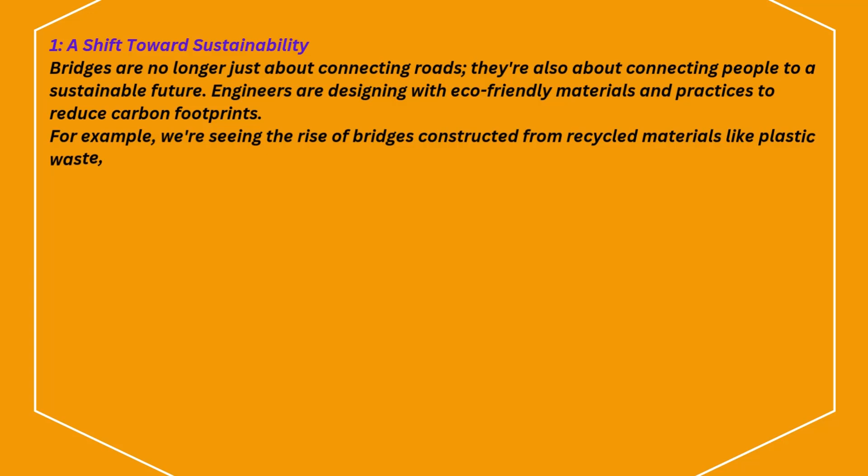1. A shift toward sustainability. Bridges are no longer just about connecting roads. They're also about connecting people to a sustainable future. Engineers are designing with eco-friendly materials and practices to reduce carbon footprints. For example, we're seeing the rise of bridges constructed from recycled materials like plastic waste, which reduce the environmental impact. The use of modular construction, where sections are built off-site and assembled on-site, not only speeds up the process but also minimizes waste and emissions during construction.

2. Innovation in structural design. Engineers are also experimenting with new shapes and forms. Traditional bridge designs like suspension and arch bridges are still relevant, but now we're seeing incredible geometric innovations. Think of bridges with lightweight, yet incredibly strong, materials such as carbon fiber composites. These materials allow for thinner, sleeker designs without compromising safety or durability. Some futuristic designs include self-healing concrete, a material that can repair cracks on its own, extending the lifespan of bridges while reducing the need for frequent maintenance. This not only saves money, but also increases the safety of the infrastructure.

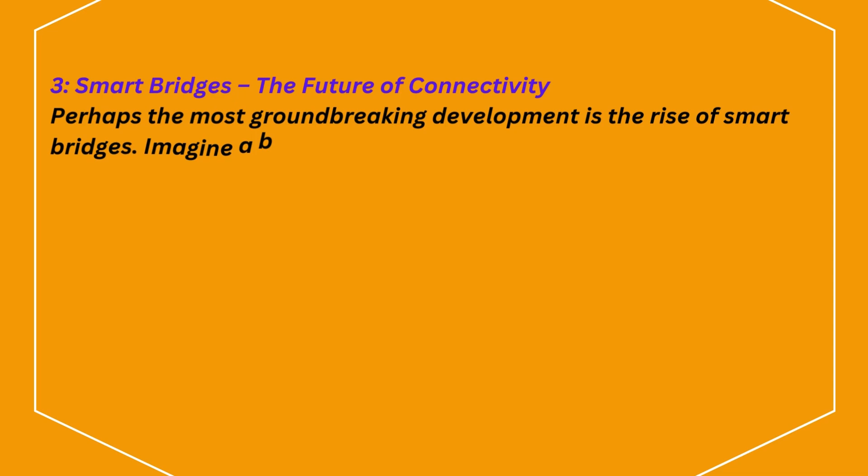3. Smart bridges, the future of connectivity. Perhaps the most groundbreaking development is the rise of smart bridges. Imagine a bridge that can monitor its own health in real time. Sensors embedded in the structure can detect stress, strain, temperature, and even potential weaknesses before they become critical. This data is transmitted to engineers who can analyze it and make real-time decisions on maintenance. Smart technology also helps in predicting how a bridge will behave under certain conditions, like heavy traffic or extreme weather. These insights make it possible to ensure the safety and longevity of bridges, all while minimizing disruptions to daily life.

4. Aesthetic and functional synergy. It's not just about functionality. Modern bridge designs are fusing aesthetics with practicality. Many bridges today are works of art, designed to be both functional and beautiful. Think of the Millau Viaduct in France or the Zhangjiajie Glass Bridge in China. These bridges attract tourists and blend harmoniously with their surroundings, showcasing that a bridge can be more than just infrastructure. It can be a landmark.

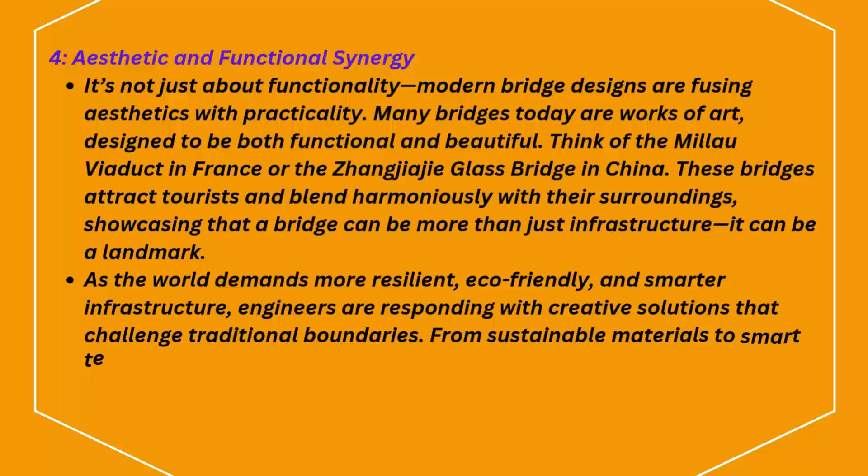As the world demands more resilient, eco-friendly, and smarter infrastructure, engineers are responding with creative solutions that challenge traditional boundaries. From sustainable materials to smart technology, the bridges of tomorrow are being built today. They don't just connect us physically, they represent the future of engineering innovation.

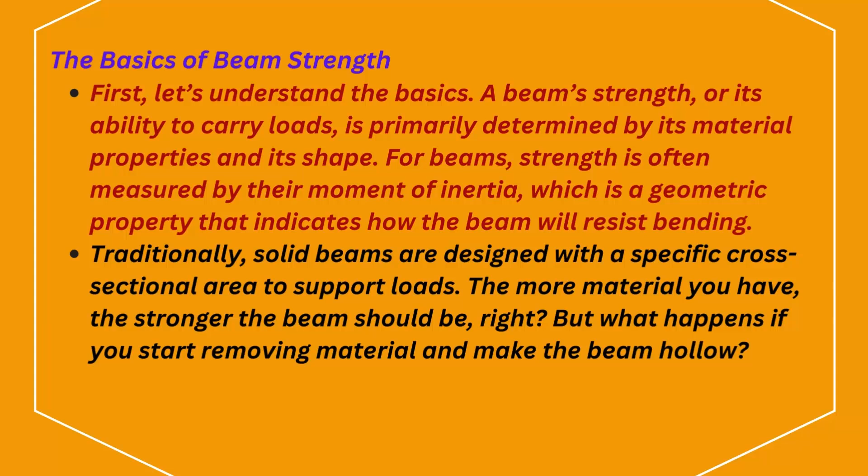The science behind hollow beams. Here's where things get interesting. Hollow beams are often used in engineering and construction for a couple of reasons. 1. Moment of inertia. The moment of inertia, which helps determine the beam's resistance to bending, can actually be increased by making the beam hollow, provided you maintain the right shape. This is because distributing the material further from the center of the beam increases its resistance to bending.

A hollow beam with a well-designed cross-section can have a higher moment of inertia compared to a solid beam of the same weight. 2. Material efficiency. By hollowing out a beam, you reduce the amount of material used while maintaining its strength. This not only reduces the weight of the beam, but also the overall cost of materials. The key is to optimize the hollow space and ensure that the beam's shape supports the load effectively.

Strength-to-weight ratio: hollow beams can achieve a better strength-to-weight ratio than solid beams. For instance, I-beams and tubular beams are hollow, but are extremely effective in resisting bending and shear forces. They're designed to be strong and lightweight, making them ideal for applications where reducing weight is crucial.

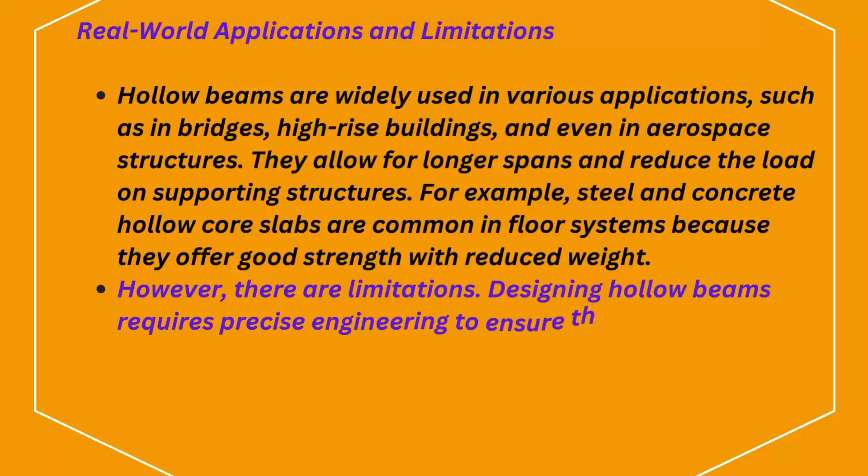Real-world applications and limitations: hollow beams are widely used in bridges, high-rise buildings, and even aerospace structures. They allow for longer spans and reduce the load on supporting structures. For example, steel and concrete hollow core slabs are common in floor systems because they offer good strength with reduced weight. However, there are limitations. Designing hollow beams requires precise engineering to ensure they can handle intended loads and stresses. If not designed correctly, hollow beams can be prone to issues like buckling or stress concentrations.

Debunking the myth: so, can you make a beam stronger by making it hollow? The answer is yes, but with qualifications. A hollow beam...

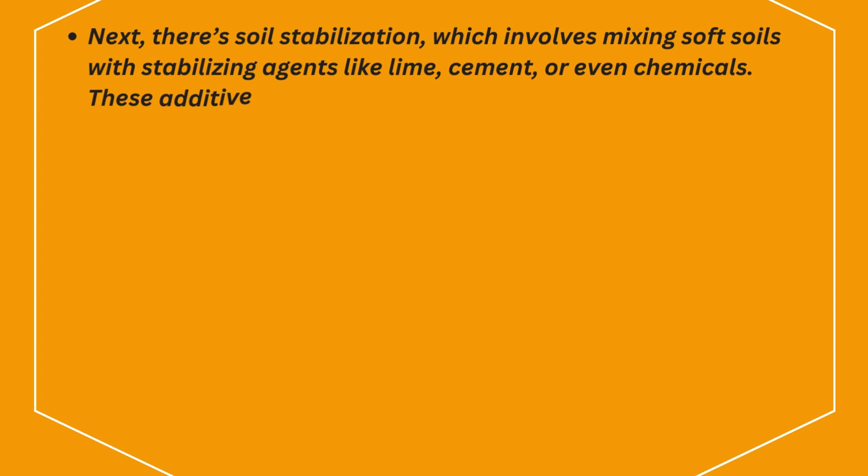These additives react with the soil to improve its strength and reduce its moisture content, making it more suitable for construction. Another technique is deep foundations, where instead of relying on surface soil, engineers drive piles—long columns made of concrete, steel, or wood—deep into the ground until they reach stable soil or bedrock. This allows the structure to transfer its load to a more secure layer, bypassing the soft soil entirely.

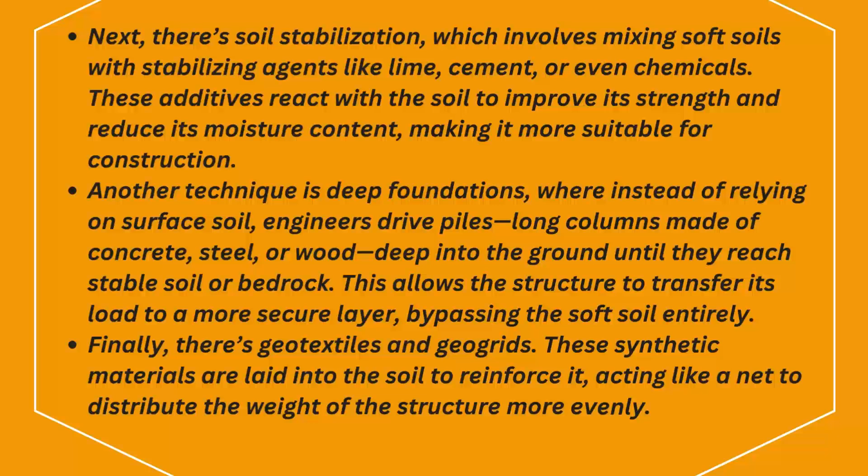Finally, there's geotextiles and geogrids. These synthetic materials are laid into the soil to reinforce it, acting like a net to distribute the weight of the structure more evenly.

Case study: One famous example of building on soft soil is the construction of the Millennium Tower in San Francisco. Initially built on deep foundations that didn't fully reach bedrock, the tower began to sink and tilt due to the soft soil underneath. Engineers are now using advanced techniques like underpinning and soil stabilization to fix the problem, demonstrating the importance of understanding soil behavior when designing large structures.

Building on soft soils is no easy task, but with innovative engineering solutions, we've turned unstable ground into solid foundations for some of the world's most iconic structures. From deep foundations to soil stabilization, civil engineering continues to push the boundaries of what's possible.

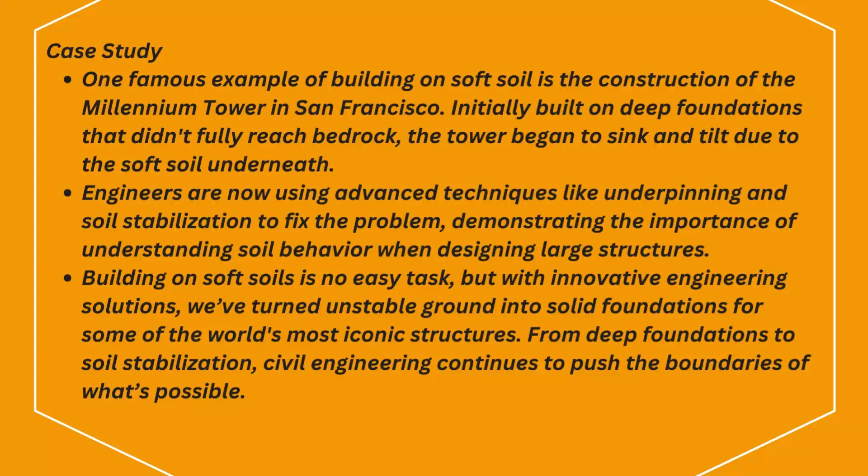Welcome back to Blueprint to Reality, the channel where we turn civil engineering concepts into everyday language. Today, we're comparing two critical structural systems used to resist lateral forces like wind and earthquakes: braced frames and moment-resisting frames. Let's dive into how these systems work and when you should use each one.

What is a braced frame? First up, the braced frame system. In this system, diagonal braces are added between columns and beams to form triangular structures that provide lateral stability. These braces create a stiff structure, allowing the building to resist lateral forces like wind and seismic activity. There are different types of braced frames, such as X-bracing and K-bracing, each designed for different needs, but they all work by converting lateral forces into tension and compression within the braces.

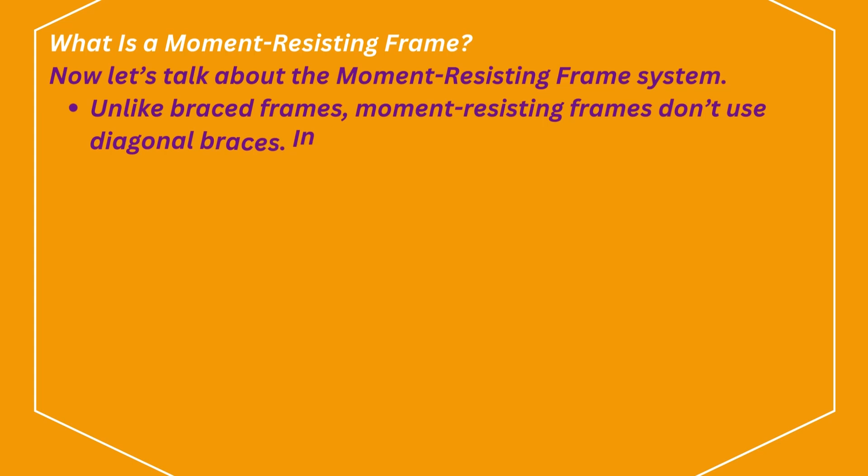What is a moment-resisting frame? Now, let's talk about the moment-resisting frame system. Unlike braced frames, moment-resisting frames don't use diagonal braces. Instead, the joints between the columns and beams are specially designed to resist rotation, meaning they carry bending moments as well as vertical loads. This system provides flexibility in design and allows for more open spaces, since you don't need diagonal braces to block off walls or windows. However, it relies heavily on the strength of the beam-column connections to resist lateral forces.

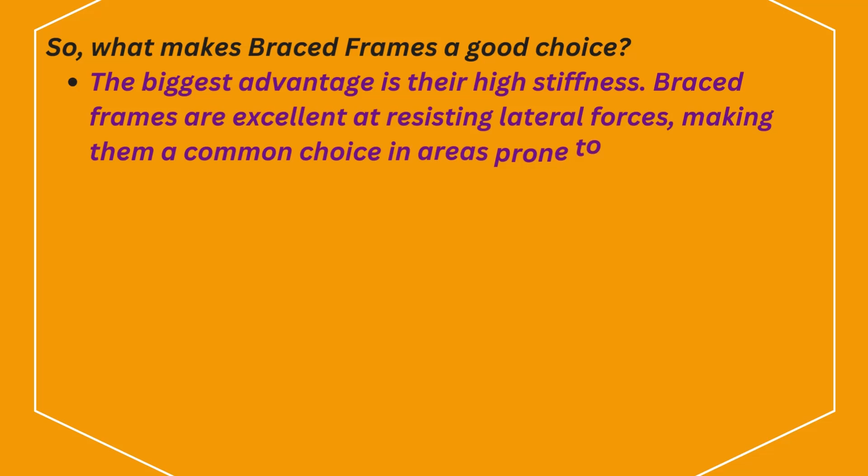So, what makes braced frames a good choice? The biggest advantage is their high stiffness. Braced frames are excellent at resisting lateral forces, making them a common choice in areas prone to earthquakes and high winds. They're also typically more cost-effective because braces are easier and faster to install than reinforced beam-column joints. However, one downside is that braced frames can restrict architectural design—the diagonal braces often limit where windows, doors, or open spaces can be placed.

Now, let's look at the strengths and weaknesses of moment-resisting frames. These frames offer more design flexibility because there are no diagonal braces. This is ideal for buildings that require large, open spaces or where aesthetics are a priority. Moment-resisting frames also allow for more natural light because you can have larger windows or open facades. However, the construction of these systems is more complex and expensive. The joints between the beams and columns need to be carefully designed and reinforced to handle both vertical and lateral loads.

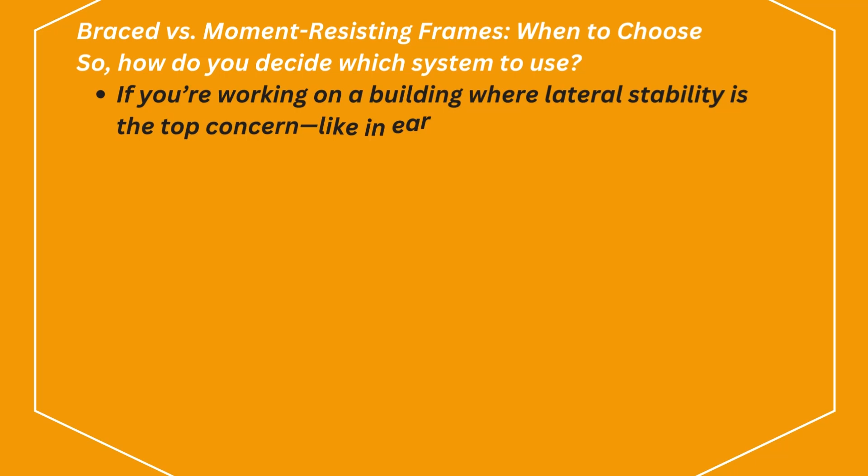Braced versus moment-resisting frames: when to choose. So, how do you decide which system to use? If you're working on a building where lateral stability is the top concern, like in earthquake-prone regions, a braced frame is often the better choice due to its stiffness and cost-effectiveness. But if your project requires flexible design and large open spaces, like in modern office buildings or high-rises, a moment-resisting frame may be worth the extra investment.

In the end, both systems play a crucial role in keeping buildings safe and stable. Your choice depends on the balance between design flexibility and lateral strength.

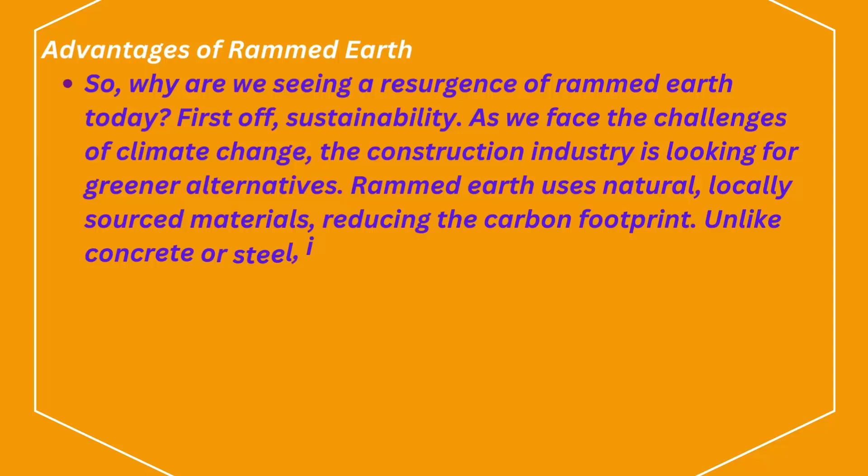Advantages of rammed earth. So why are we seeing a resurgence of rammed earth today? First off, sustainability. As we face the challenges of climate change, the construction industry is looking for greener alternatives. Rammed earth uses natural, locally sourced materials, reducing the carbon footprint.

Unlike concrete or steel, it doesn't require high-energy production processes. Secondly, its thermal properties are a major benefit. Rammed earth walls provide excellent insulation, helping to regulate indoor temperatures naturally. This means reduced energy consumption for heating and cooling.

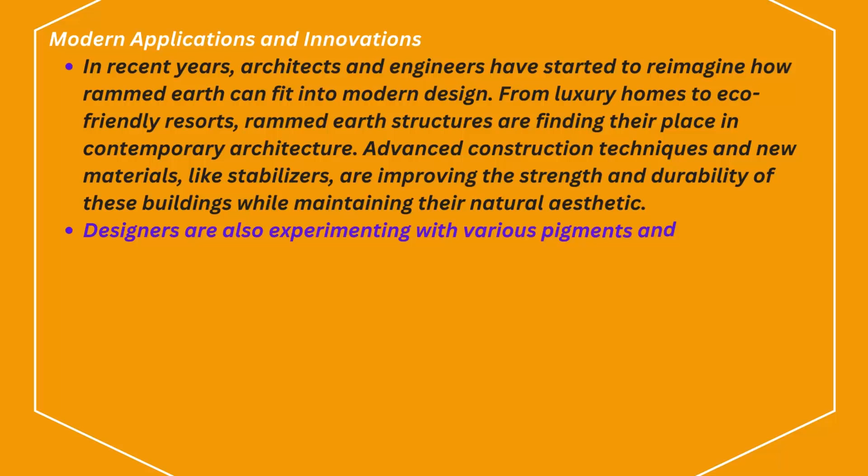Modern applications and innovations. In recent years, architects and engineers have started to reimagine how rammed earth can fit into modern design. From luxury homes to eco-friendly resorts, rammed earth structures are finding their place in contemporary architecture. Advanced construction techniques and new materials, like stabilizers, are improving the strength and durability of these buildings while maintaining their natural aesthetic. Designers are also experimenting with various pigments and textures, creating visually striking structures that blend seamlessly with their surroundings.

Rammed earth is a perfect blend of ancient wisdom and modern innovation, offering a sustainable, durable, and beautiful building solution. As we move forward in the age of eco-conscious design, this technique may play a key role in reshaping how we think about construction.

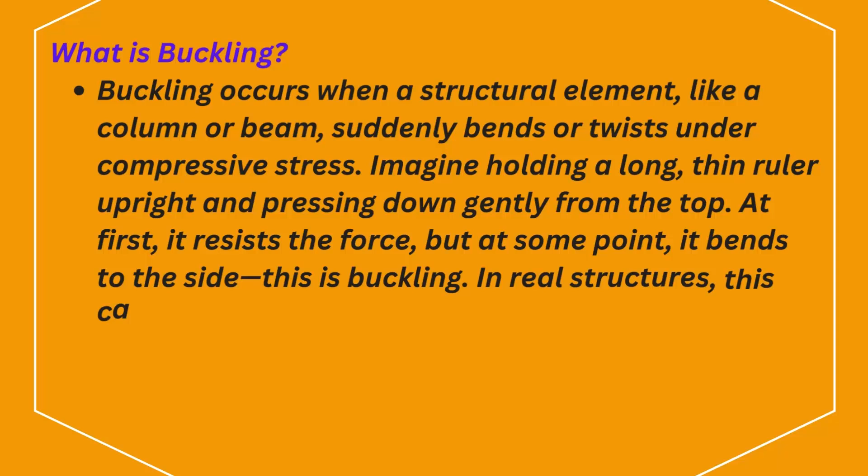This is buckling. In real structures, this can be extremely dangerous. Columns in buildings or bridges are especially vulnerable to buckling when they are subjected to too much weight or force.

Why does buckling lead to collapse? Buckling is dangerous because it often happens without warning. When a structure buckles, the load it was carrying can no longer be supported.

For example, in a skyscraper, if a column buckles, the entire weight of the building above that point may no longer have the proper support, leading to a rapid and catastrophic collapse. This is why buckling is one of the key failure mechanisms that engineers must consider in their designs, especially for tall buildings and slender structures.

Critical load, the tipping point. So what determines whether or not a structure will buckle? Engineers calculate something called the critical load, which is the maximum load a column or beam can handle before buckling.

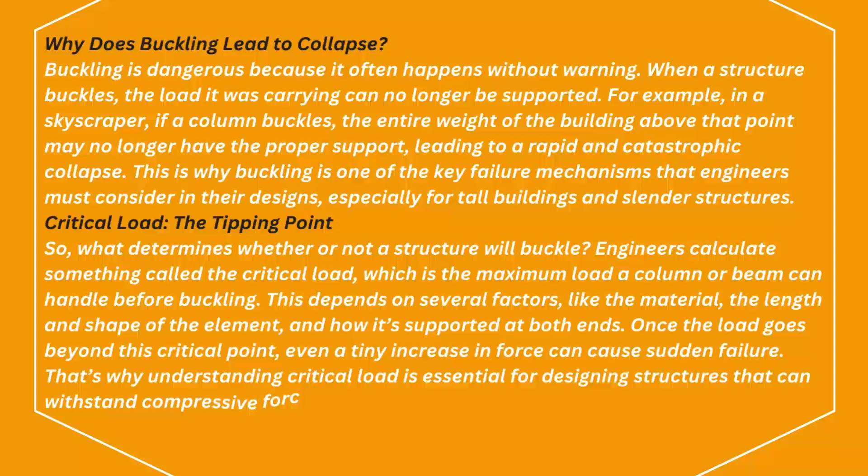This depends on several factors, like the material, the length and shape of the element, and how it's supported at both ends. Once the load goes beyond this critical point, even a tiny increase in force can cause sudden failure. That's why understanding critical load is essential for designing structures that can withstand compressive forces.

Preventing buckling in structural design. To prevent buckling, engineers reinforce structures by adding bracing, using stronger materials, or making columns thicker to resist compressive forces. Sometimes, reducing the length of the columns or providing better support at the base can also minimize the risk. By understanding the causes and effects of buckling, engineers can create safer structures that won't fail under unexpected loads.

Conclusion. In summary, buckling is a silent but severe threat in structural engineering. When a structure buckles under compressive stress, it loses its ability to support loads, leading to potential collapse. By carefully calculating the critical load and designing to prevent buckling, engineers ensure that buildings, bridges, and other structures remain safe and stable, even under heavy loads.

Thanks for listening, and remember, structural safety is all about understanding and preventing failures like buckling.

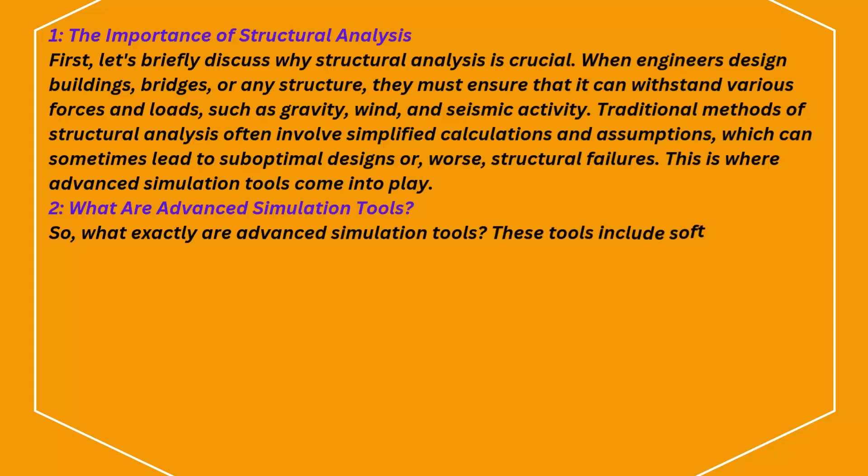So what exactly are advanced simulation tools? These tools include software programs that use finite element analysis, computational fluid dynamics, and other numerical methods to create detailed models of structures. By simulating real-world conditions, these tools allow engineers to visualize how a structure will respond to different forces throughout its life cycle. For example, finite element analysis software breaks down a structure into smaller, manageable elements, calculating how each one behaves under various conditions. This level of detail provides insights that traditional methods simply cannot offer.

Now let's talk about the benefits of using these advanced simulation tools in structural analysis. One of the primary advantages is enhanced accuracy. By taking into account the unique material properties, boundary conditions, and load scenarios, engineers can make better informed decisions. This leads to designs that are not only safer, but also more efficient in material usage.

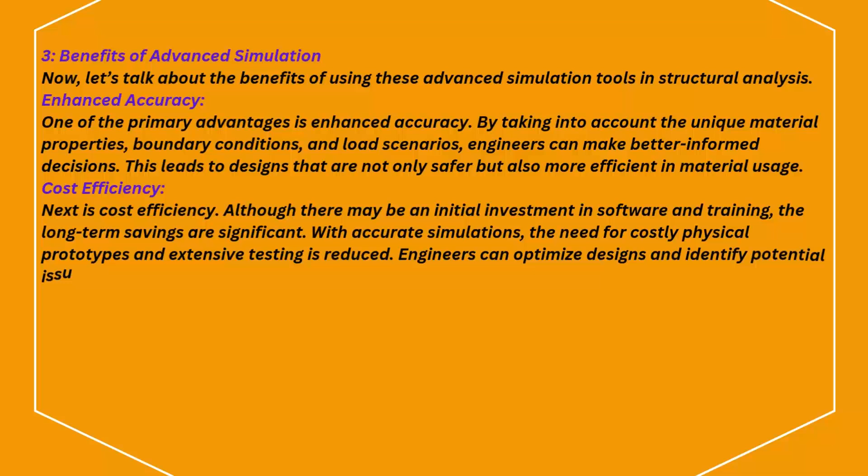Next is cost efficiency. Although there may be an initial investment in software and training, the long-term savings are significant. With accurate simulations, the need for costly physical prototypes and extensive testing is reduced. Engineers can optimize designs and identify potential issues early in the process, saving both time and money.

Moreover, safety is a critical concern in engineering. Advanced simulation tools enable engineers to conduct comprehensive risk assessments and safety evaluations. By simulating extreme conditions, such as earthquakes or heavy winds, engineers can better understand how structures will behave and implement necessary reinforcements or changes before construction begins.

Let's look at some real-world applications. For instance, in the aerospace industry, companies use advanced simulation tools to analyze the structural integrity of aircraft components under various flight conditions. In civil engineering, simulations help design earthquake-resistant buildings in seismic zones, ensuring they can withstand potential disasters.

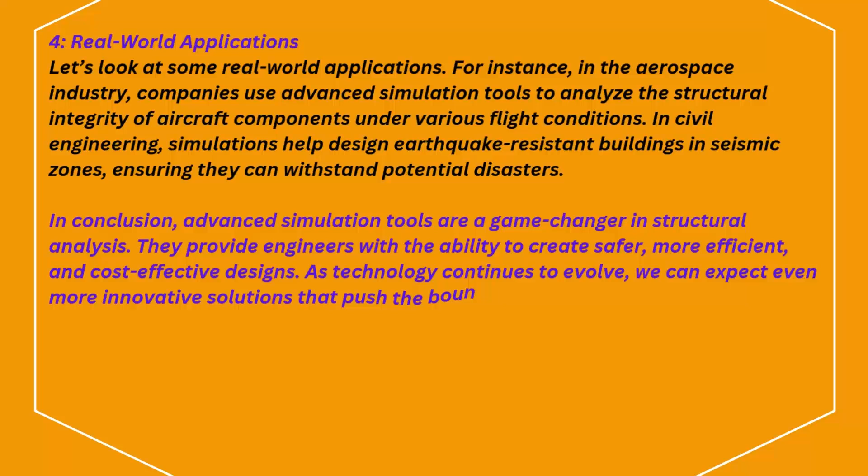In conclusion, advanced simulation tools are a game-changer in structural analysis. They provide engineers with the ability to create safer, more efficient, and cost-effective designs. As technology continues to evolve, we can expect even more innovative solutions that push the boundaries of what's possible in engineering. Thank you for joining us today.

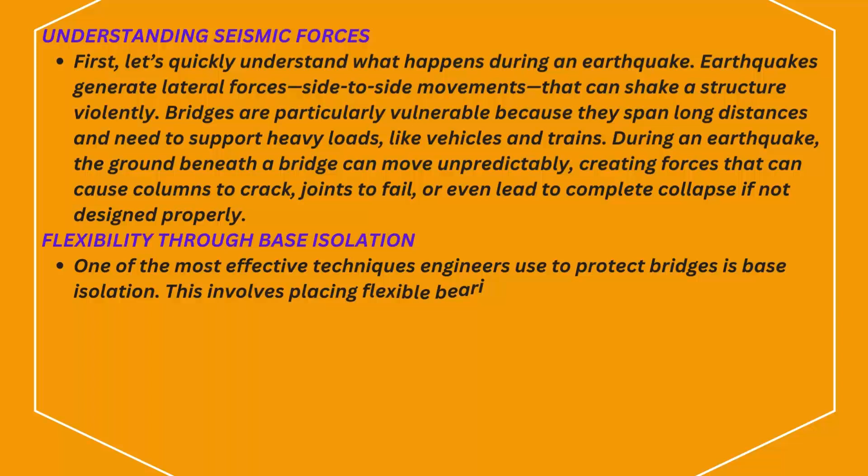Flexibility through base isolation: one of the most effective techniques engineers use to protect bridges is base isolation. This involves placing flexible bearings or isolators between the bridge structure and its foundation. These isolators act like shock absorbers, allowing the bridge to move independently of the ground during an earthquake. By isolating the movement, the bridge can sway with the seismic waves without absorbing the full force of the ground shaking, greatly reducing the risk of damage.

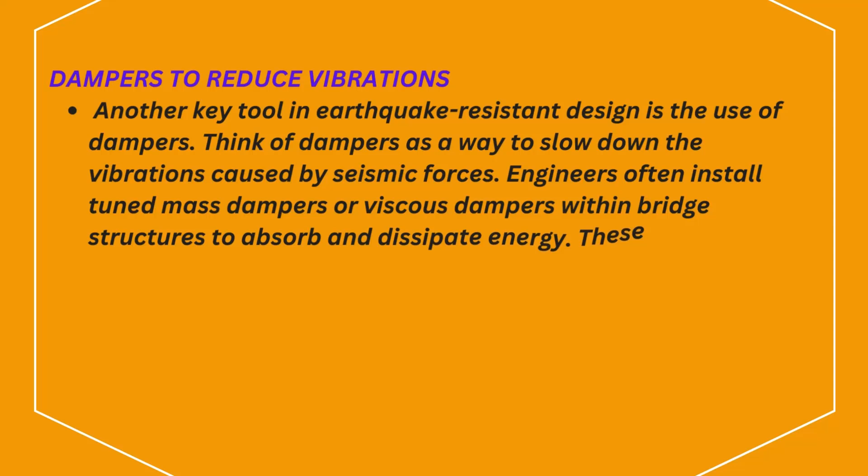Dampers to reduce vibrations: another key tool in earthquake-resistant design is the use of dampers. Think of dampers as a way to slow down the vibrations caused by seismic forces. Engineers often install tuned mass dampers or viscous dampers within bridge structures to absorb and dissipate energy. These devices can reduce the amplitude of vibrations, minimizing the impact on the bridge's key components like its deck and supports. Dampers essentially help calm the shaking, protecting the bridge from excessive stress.

Reinforced pillars and foundations: the next critical aspect of earthquake-resistant design is reinforced pillars and foundations. Engineers use reinforced concrete and steel to strengthen the columns and piers that support bridges. This reinforcement helps resist the intense shear and bending forces caused by earthquakes. In some cases, engineers also use deep foundations or piles that extend far below the surface to reach stable soil or bedrock, ensuring the bridge remains stable even when the ground above it shakes.

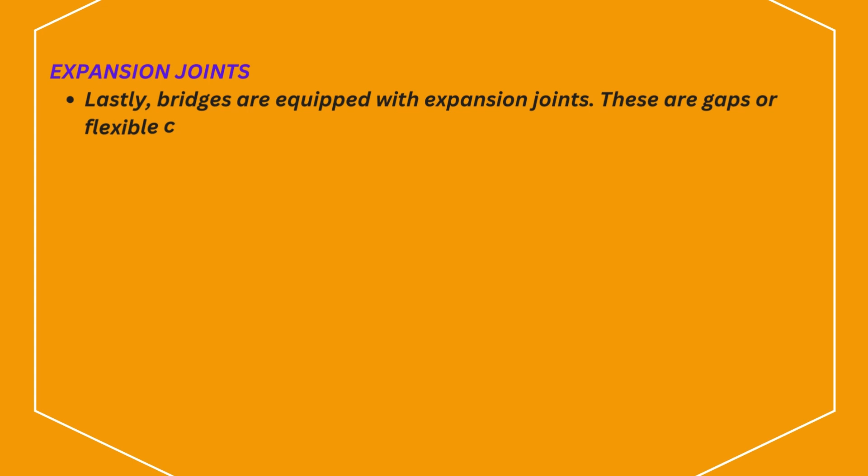Lastly, bridges are equipped with expansion joints. These are gaps or flexible connections that allow different parts of the bridge to move independently during seismic activity. By providing space for controlled movement, expansion joints prevent parts of the bridge from colliding with each other or cracking under stress. They help ensure the bridge can flex without breaking.

By using base isolators, dampers, reinforced pillars, deep foundations, and expansion joints, engineers create bridges that can resist the devastating effects of earthquakes. The goal isn't to make bridges completely unmovable, it's to allow them to flex and absorb seismic forces without collapsing.

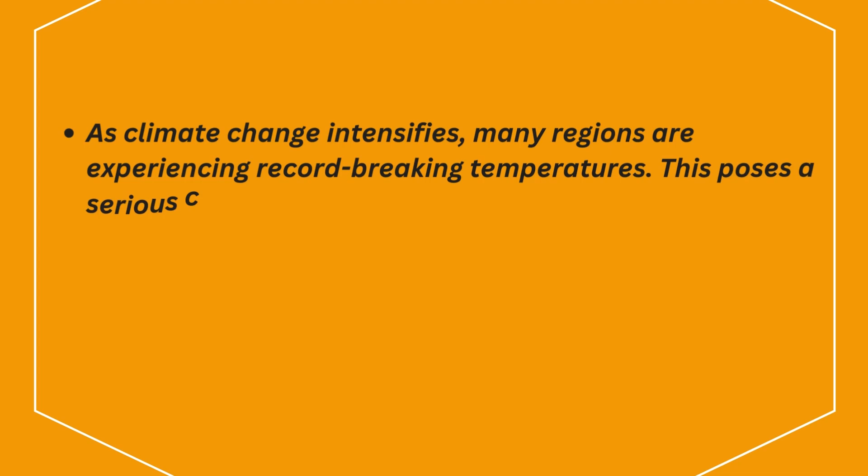As climate change intensifies, many regions are experiencing record-breaking temperatures. This poses a serious challenge for buildings, especially in areas prone to heat waves. But don't worry, we have some smart structural solutions that can help make buildings more resilient to rising temperatures.

The first solution to consider is thermal mass. But what exactly is it? Thermal mass refers to a material's ability to absorb and store heat. In buildings designed for hot climates, materials like concrete, brick, or stone can be used to regulate indoor temperatures. By absorbing heat during the day and releasing it slowly at night, thermal mass can reduce temperature fluctuations. This helps keep interiors cooler during the hottest parts of the day without relying heavily on air conditioning, which saves energy and reduces the building's carbon footprint.

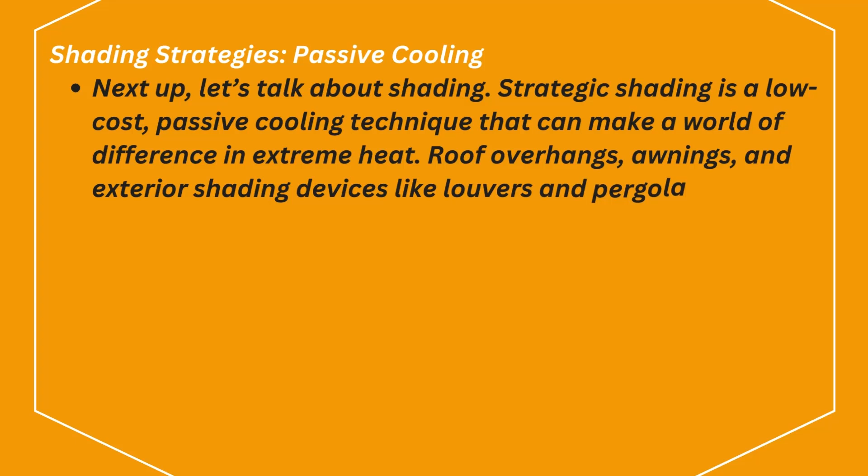Next up, let's talk about shading. Strategic shading is a low-cost, passive cooling technique that can make a world of difference in extreme heat. Roof overhangs, awnings, and exterior shading devices like louvers and pergolas can block direct sunlight from hitting the building's windows and walls. By keeping the sun's rays off the building, shading reduces the amount of heat entering the structure. It's simple, yet highly effective. Combining shading with reflective or light-colored materials further minimizes heat absorption, keeping the structure cool from the outside in.

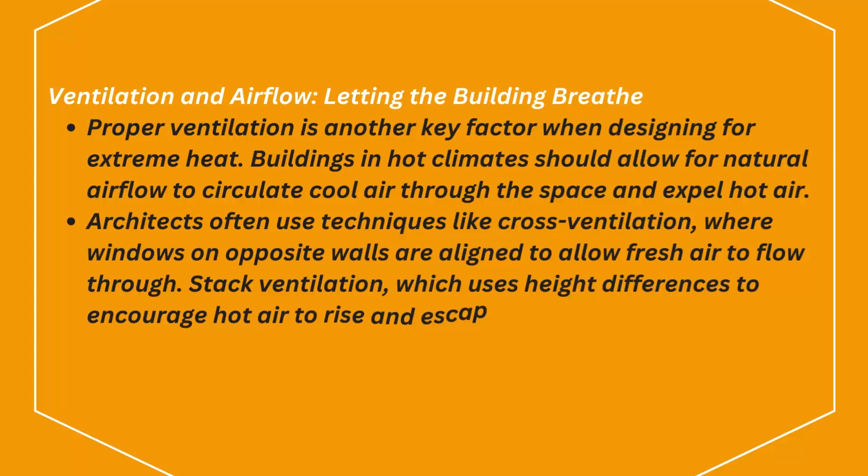Proper ventilation is another key factor when designing for extreme heat. Buildings in hot climates should allow for natural airflow to circulate cool air through the space and expel hot air. Architects often use techniques like cross-ventilation, where windows on opposite walls are aligned to allow fresh air to flow through. Stack ventilation, which uses height differences to encourage hot air to rise and escape, can also be used to keep interiors cool.

Finally, let's explore some innovative materials. Reflective roof coatings and paints can bounce sunlight away from the building, reducing heat buildup. Insulating materials like aerogels provide superior protection against heat transfer, keeping interiors comfortable. These materials not only protect against extreme heat, but also improve the building's energy efficiency, making them a smart choice for future-proofing structures.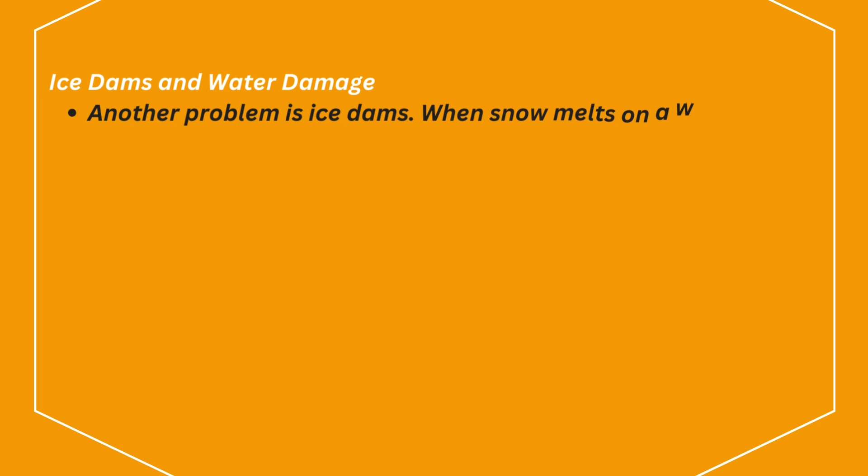These designs reduce the risk of snow accumulating and overloading the structure. Another problem is ice dams. When snow melts on a warm roof and then refreezes at the colder edges, it creates ice dams that can trap water. This trapped water can seep into a building's roof and walls, causing serious damage. Engineers combat this by improving insulation and ventilation in roofs to maintain an even temperature and prevent the formation of ice dams. Proper drainage systems are also key, ensuring that melted snow has a clear path away from the building, preventing both ice buildup and water infiltration.

Thermal expansion and contraction. Cold temperatures also lead to the issue of thermal expansion and contraction. Materials like steel and concrete expand in warm weather and contract in the cold. Over time, this constant movement can cause cracks and weaken structures. Engineers account for this by using flexible materials in critical areas, allowing buildings to expand and contract without causing damage.

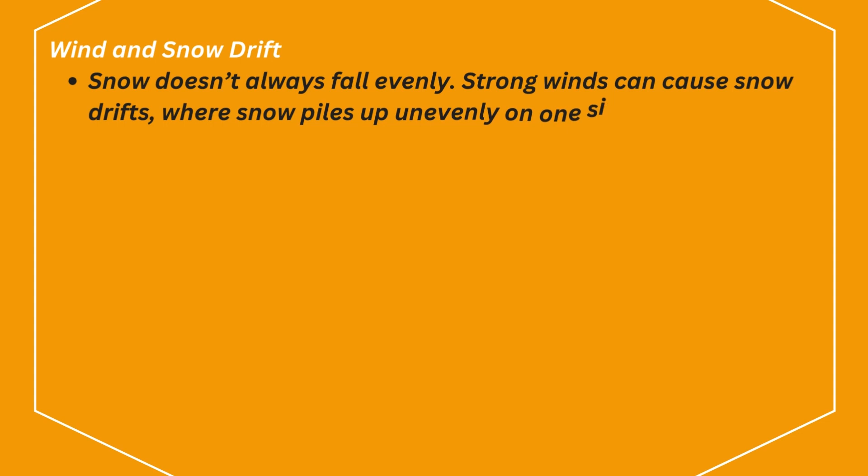Wind and snow drift. Snow doesn't always fall evenly. Strong winds can cause snow drifts, where snow piles up unevenly on one side of a building. This creates unbalanced loads, which can strain the structure in unexpected ways. Engineers design buildings to handle these uneven forces by reinforcing the most vulnerable areas and incorporating wind barriers to control snow distribution. In regions where ice and snow are common, building design requires careful planning and engineering to prevent damage and ensure safety. From steep roofs to advanced drainage systems, engineers use a variety of techniques to keep buildings strong in the face of winter's challenges.

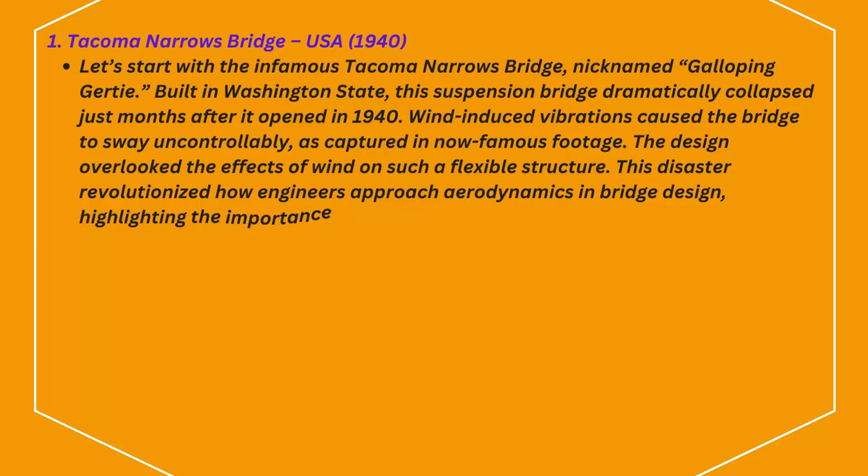2. Hyatt Regency Walkway Collapse, USA, 1981. Next is the Hyatt Regency Walkway collapse in Kansas City, Missouri, in 1981. During a hotel event, 2 suspended walkways gave way, falling onto a crowded lobby below. This collapse killed 114 people and remains one of the deadliest structural failures in U.S. history. The cause? A change in the original design for the walkway's support rods, which couldn't bear the load. This disaster emphasized the dangers of modifying structural designs without thorough re-evaluation.

3. Ronan Point Tower, UK, 1968. The collapse of Ronan Point, a residential tower in London, occurred just 2 months after it was completed. In 1968, a gas explosion on the 18th floor caused one corner of the building to collapse like a stack of dominoes. The failure exposed the fragility of precast concrete panel construction and poor connections between structural components. This disaster led to stricter regulations on high-rise buildings in the UK and better safety standards for gas installations.

4. Sampoong Department Store, South Korea, 1995. In 1995, the Sampoong Department Store in Seoul collapsed without warning, killing over 500 people. The building's failure was caused by illegal modifications to the original structure, including the removal of support columns and overloading of the rooftop. The disaster was a wake-up call about the dangers of ignoring engineering principles in favor of profit, stressing the importance of strict adherence to structural integrity.

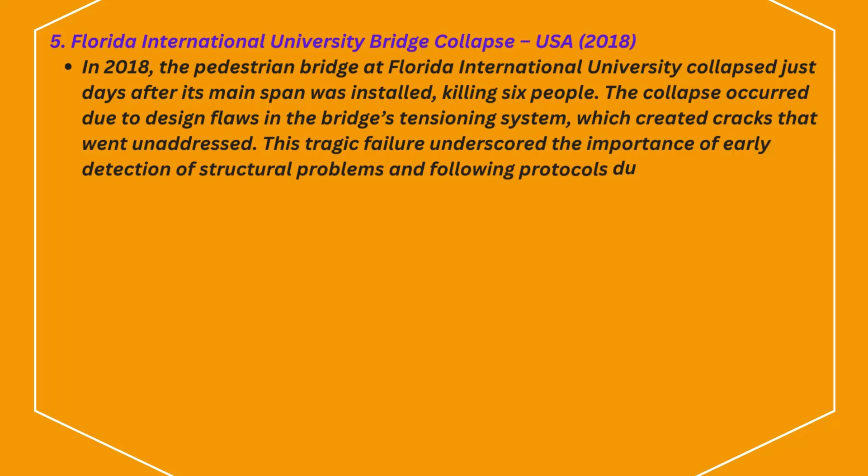6. Rana Plaza Factory Collapse, Bangladesh, 2013. The Rana Plaza factory collapse in Bangladesh is one of the deadliest structural failures in history, killing over 1,100 workers in 2013. The building, which housed multiple garment factories, was poorly constructed with substandard materials and unauthorized floors. The collapse revealed the extreme dangers of cutting costs at the expense of safety and led to worldwide scrutiny of building regulations in developing countries.

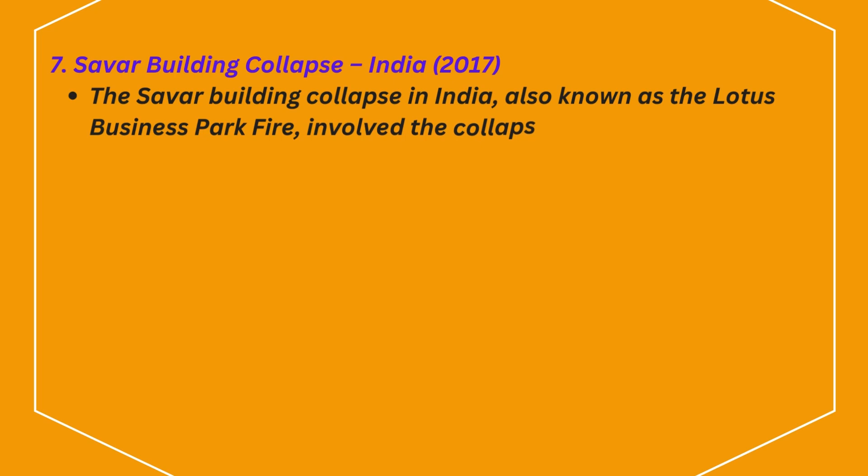7. Savar Building Collapse, India, 2017. The Savar Building collapse in India, also known as the Lotus Business Park fire, involved the collapse of an under-construction building due to poor materials and design. This incident highlighted the need for quality control and proper oversight, particularly in fast-growing urban areas where construction standards may be compromised. Each of these disasters demonstrates what can happen when engineering goes wrong, whether through design flaws, cost-cutting, or poor execution. But they've also paved the way for better practices, stricter regulations, and new technologies.

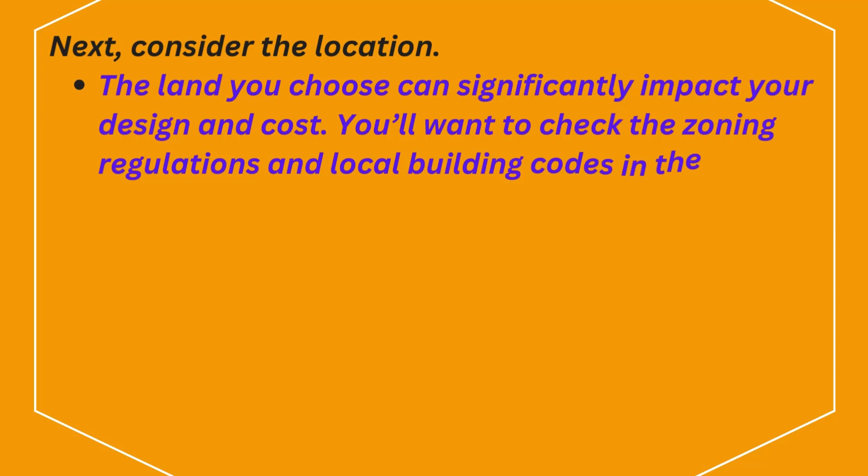Next, consider the location. The land you choose can significantly impact your design and cost. You'll want to check the zoning regulations and local building codes in the area. These will dictate what type of structures you can build, how close to the property line you can go, and what environmental considerations need to be accounted for.

Also, think about the future. Access to schools, shops, and transportation can affect long-term value.

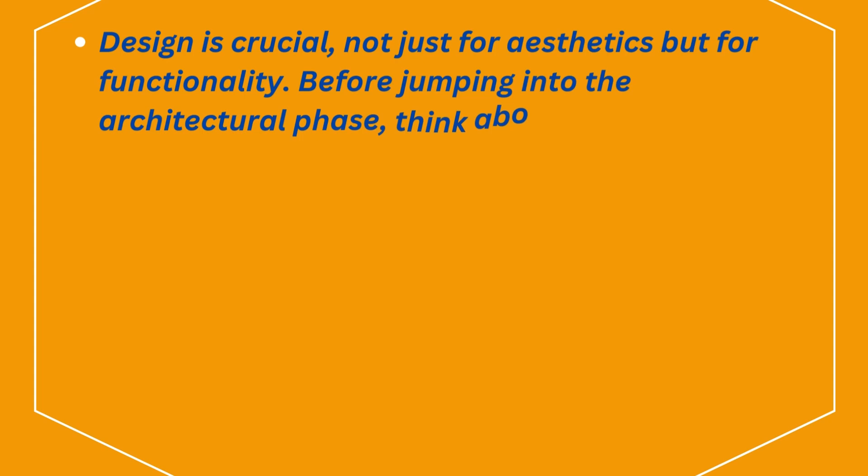Design is crucial, not just for aesthetics, but for functionality. Before jumping into the architectural phase, think about your lifestyle. Do you need a home office? What about a guest room or space for future expansions? Pay attention to the layout and flow, how rooms are connected, natural lighting, and storage solutions. Work closely with your architect or designer to ensure the home meets your present and future needs.

Building a home requires a team of professionals: architects, contractors, and engineers. Do your research and hire a licensed, experienced contractor who has a good reputation. Don't rush the process of selecting your team, and be sure to check references and past projects. A well-coordinated team can save you time, money, and headaches down the line.

Finally, set realistic expectations for your timeline. Construction projects often take longer than expected due to weather, material delays, or labor shortages. Be patient and flexible with your schedule, but also stay involved and keep communication open with your team to ensure things are moving forward. Building a house is a big undertaking, but with the right preparation, it can be a rewarding experience. Keep these tips in mind to stay on track.

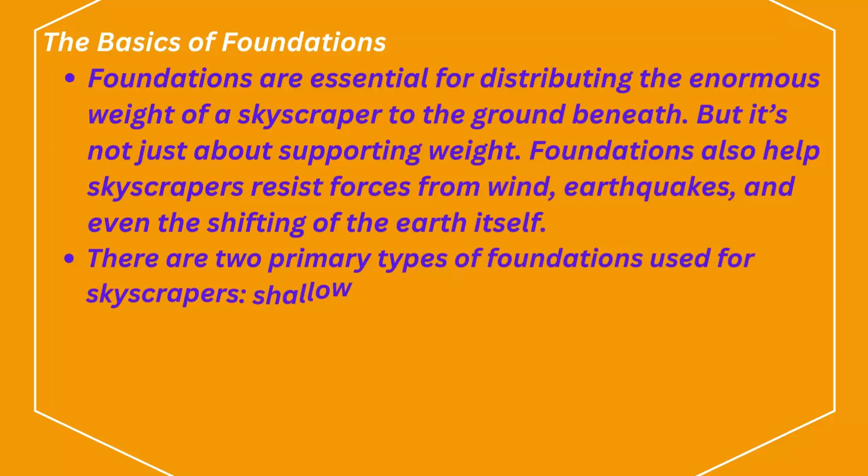There are two primary types of foundations used for skyscrapers: shallow foundations and deep foundations. For small buildings, shallow foundations are usually enough. But skyscrapers? They need something much more robust.

Deep foundations explained. Skyscrapers rely on deep foundations, which go far below the surface, to find solid ground or bedrock. The most common types are piles and caissons. Piles are long, slender columns made of concrete, steel, or even wood that are driven deep into the earth. These piles either reach bedrock or are driven into dense layers of soil that can support the building's weight. The goal? To transfer the load from the skyscraper down to a stronger, more stable layer of earth.

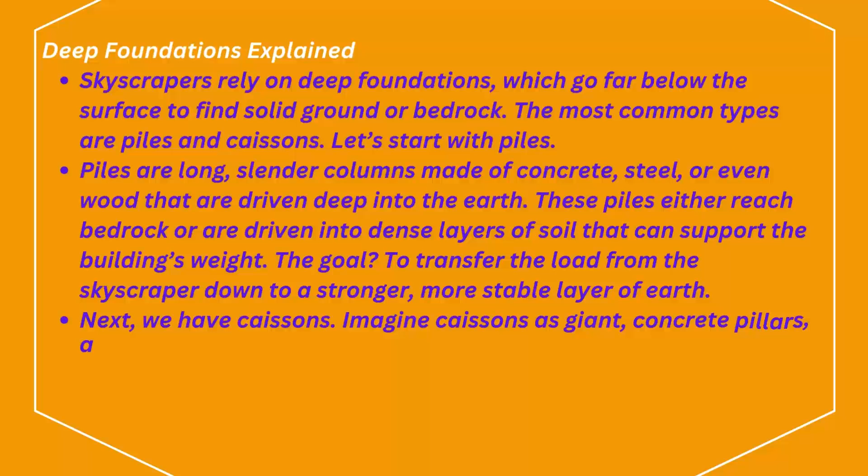Next, we have caissons. Imagine caissons as giant, concrete pillars, almost like enormous, buried columns that reach bedrock. Workers excavate deep shafts, fill them with concrete, and voila, you've got a super strong foundation.

Challenges of building foundations. But it's not always easy. In cities like New York and Chicago, where skyscrapers are everywhere, engineers have to deal with unpredictable soil, water tables, and nearby structures. Sometimes they use a technique called friction piles, where the friction between the soil and the sides of the piles helps support the weight of the building.

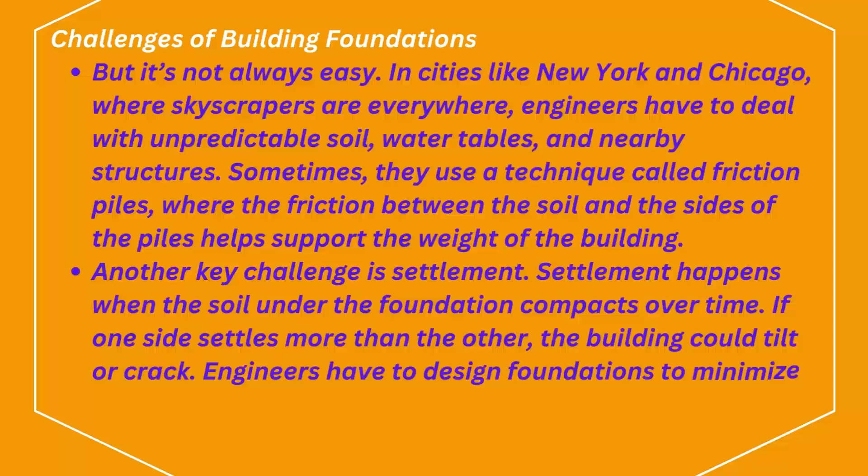Another key challenge is settlement. Settlement happens when the soil under the foundation compacts over time. If one side settles more than the other, the building could tilt or crack. Engineers have to design foundations to minimize this uneven settlement.

How foundations resist external forces. Now, skyscrapers aren't just sitting on the ground. They're battling natural forces like wind and earthquakes. This is where the foundation really shines.

Wind. The foundation anchors the entire structure, preventing it from swaying too much. Engineers even build in flexibility, allowing the skyscraper to move slightly without causing damage. In earthquake-prone areas, the foundation often has to absorb seismic energy.

Engineers use flexible materials and base isolators in the foundation to cushion the impact of an earthquake, reducing the stress on the building itself.

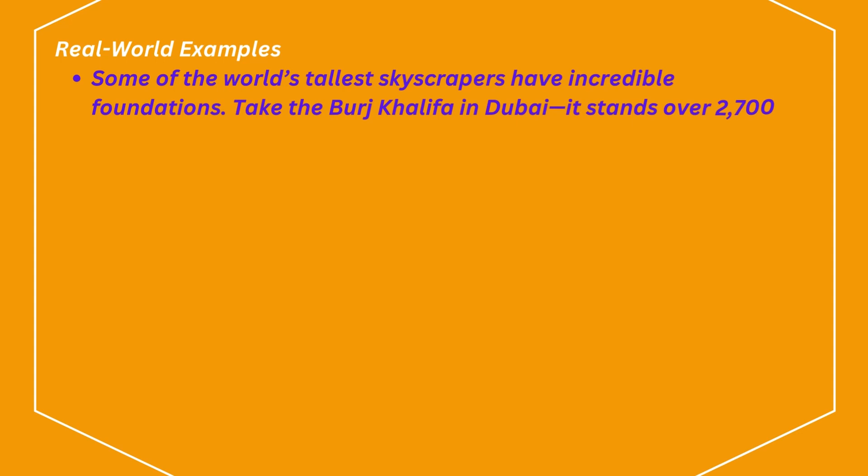Real-world examples: some of the world's tallest skyscrapers have incredible foundations. Take the Burj Khalifa in Dubai. It stands over 2,700 feet tall and has a foundation that extends over 160 feet into the ground, made up of reinforced concrete piles. Then there's the Shanghai Tower, which uses both piles and caissons to deal with the soft soil and seismic risks of the region. Its foundation is built to withstand high winds and potential earthquakes.

So, how do foundations support skyscrapers? By reaching deep into the earth, anchoring the building to solid ground, and resisting the natural forces that could bring it down. Without these marvels of engineering, the towering skylines of cities around the world wouldn't be possible.

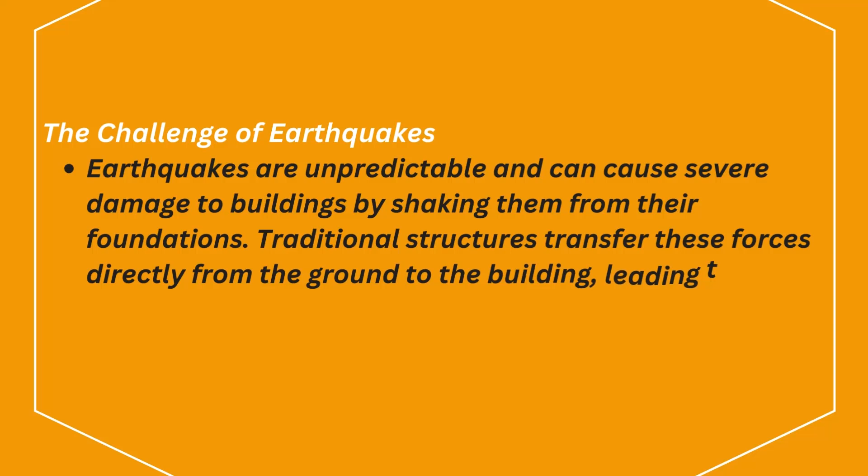Earthquakes are unpredictable and can cause severe damage to buildings by shaking them from their foundations. Traditional structures transfer these forces directly from the ground to the building, leading to cracks, collapses, and structural failures. But innovations like base isolators and tuned mass dampers are revolutionizing how we build to withstand seismic events.

Base isolators. Let's start with base isolators. These devices are installed between a building's foundation and its structure, acting as a buffer during an earthquake. Instead of letting the building move with the ground, base isolators allow the foundation to shift independently from the rest of the structure. This reduces the amount of force transferred to the building, dramatically lowering the risk of damage.

Base isolators typically consist of layers of rubber and steel with a flexible core. When seismic waves hit, the isolators absorb and spread out the energy, allowing the building above to sway gently without absorbing the full impact. Tuned mass dampers.

Now let's talk about tuned mass dampers, another powerful innovation. These are massive weights, usually installed at the top of a building, that move in opposition to seismic vibrations. When an earthquake shakes the building, the damper swings in the opposite direction, effectively canceling out much of the motion.

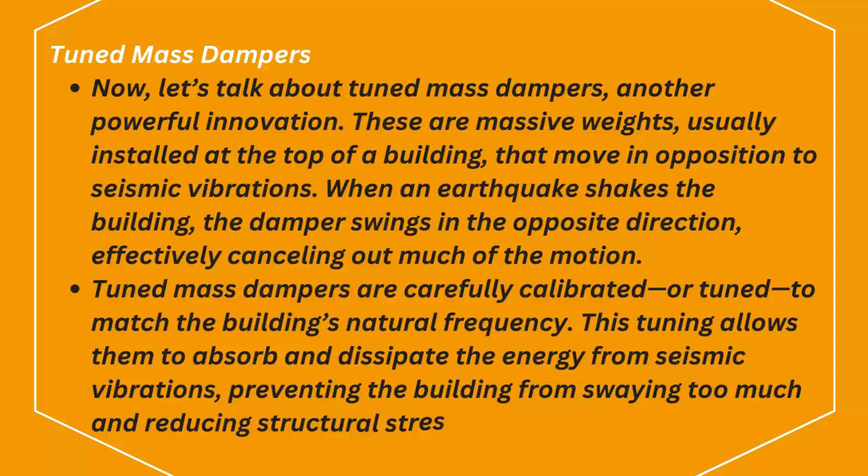Tuned mass dampers are carefully calibrated, or tuned, to match the building's natural frequency. This tuning allows them to absorb and dissipate the energy from seismic vibrations, preventing the building from swaying too much and reducing structural stress. How they work together.

Together, base isolators and tuned mass dampers create a powerful defense against earthquakes. Base isolators protect the building from ground motion, while tuned mass dampers reduce vibrations in the upper structure, making the building safer and more resilient. Innovations like these are changing the way we design buildings in earthquake-prone areas, saving lives and protecting property.

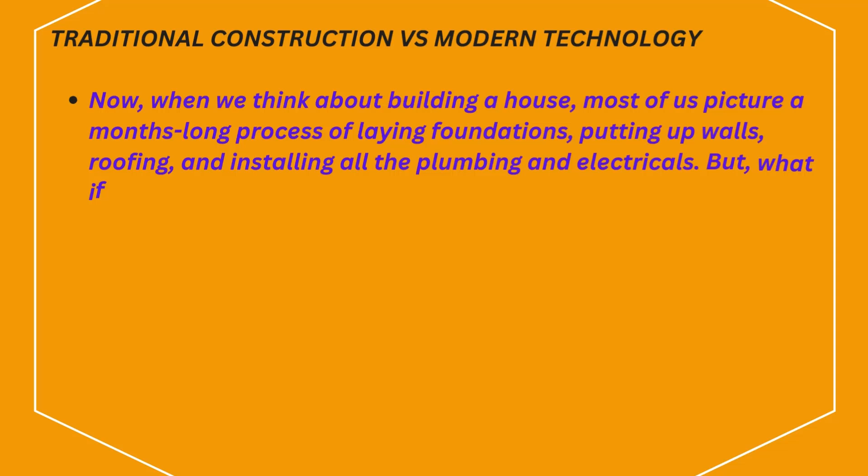Traditional construction versus modern technology. Now, when we think about building a house, most of us picture a months-long process of laying foundations, putting up walls, roofing, and installing all the plumbing and electricals. But what if I told you modern technology has completely revolutionized this?

We're talking about 3D printing, modular homes, and prefabrication, some of the cutting-edge methods that are making fast builds a possibility. Traditional construction involves a lot of manual labor and material delivery delays, but these modern techniques are changing the game.

3D printed houses. Let's start with one of the most exciting innovations, 3D printed homes. Believe it or not, entire houses are now being printed layer by layer using a large-scale 3D printer. This method eliminates the need for traditional bricks, wood, and steel framing, replacing them with concrete or composite materials. But how fast can it really be? In some cases, companies like ICON and Apis Cor have managed to print the walls of a small house in as little as 24 to 48 hours.

That's incredible speed when you think about how long it takes to build walls with traditional methods. However, it's important to note that the 24-hour time frame only applies to the structure itself. You'll still need to install the roof, windows, and finish the interior, which can take additional time.

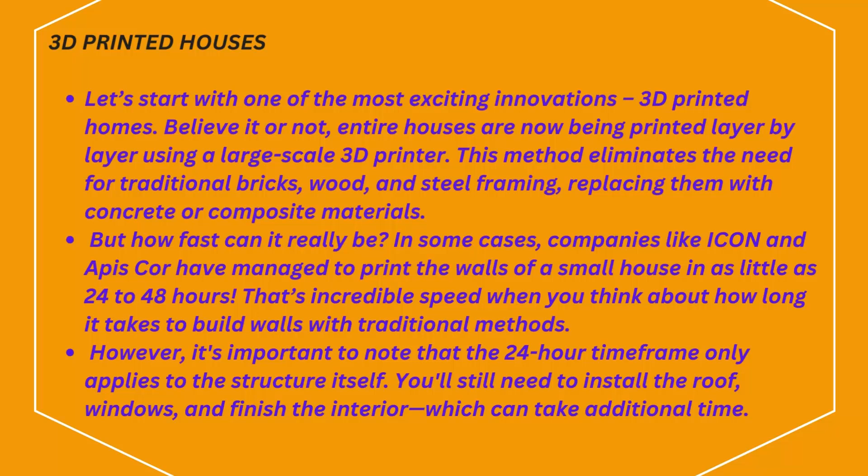Next up, we have modular homes. Think of these as building blocks that are pre-made in a factory, then shipped to your site and assembled like giant Lego pieces. Because the modules are pre-built, the assembly process can take as little as a single day. Yes, that's right, a house assembled in 24 hours. But again, there's a catch. While the assembly is fast, the modules still have to be manufactured ahead of time, which usually takes weeks. So technically, the house can be put together quickly, but the preparation behind the scenes is what makes it possible.

So, can you really live in a house that was built in 24 hours? The short answer is, it depends. While the structure of a home can be assembled or printed in under a day with these methods, the full completion, adding electrical, plumbing, finishing touches, and inspections, still takes time. These quick builds are great for emergency housing, disaster relief, or those looking for ultra-speedy solutions. But for most of us, the idea of a fully livable, custom home in 24 hours is still just a bit out of reach.

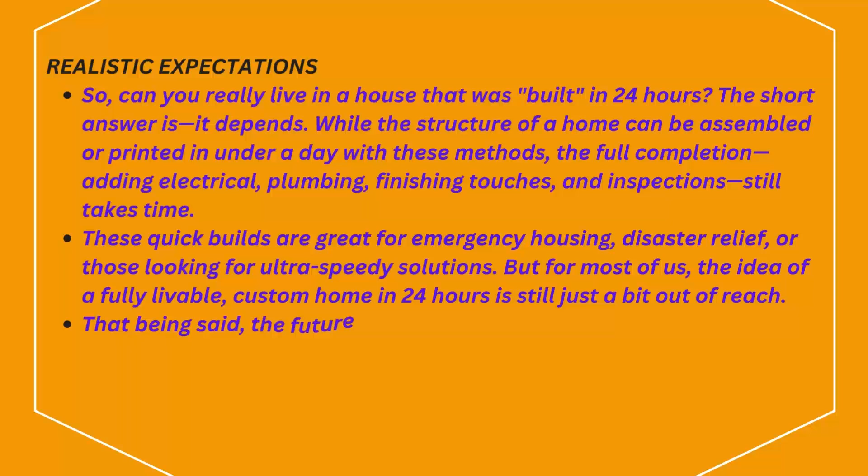Today, we're diving into one of the most fundamental debates in structural engineering, steel frames versus concrete frames. Which is better for your project? Let's break it down. First, what exactly are we comparing?

A steel frame consists of vertical columns and horizontal beams made from structural steel. These frames are like the skeleton of a building, holding up the weight of everything else. A concrete frame is made from reinforced concrete combined with steel bars. Like steel frames, these structures also act as the skeleton but with a much heavier composition.

Let's start with steel. Why is steel so popular? Steel frames are incredibly strong and lightweight. They have a high strength-to-weight ratio, which means less material can support more weight. Steel also allows for flexibility in design. Architects love steel because it can span large distances, which makes it ideal for projects like skyscrapers or large industrial warehouses.

However, steel has some drawbacks. It's susceptible to corrosion, especially in harsh weather conditions. This means maintenance costs can add up over time. And steel loses strength in high temperatures, so in case of fire, special fireproofing treatments are needed.

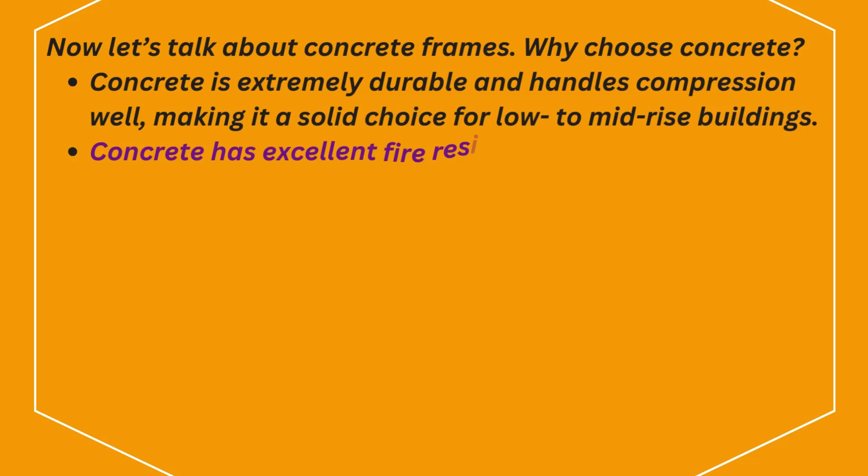Now, let's talk about concrete frames. Why choose concrete? Concrete is extremely durable and handles compression well, making it a solid choice for low to mid-rise buildings. Concrete has excellent fire resistance, and it's great for projects where fire safety is a priority. However, concrete frames are much heavier than steel. That means the foundation has to support more weight, which can increase construction time and cost. Another issue with concrete is its low tensile strength, which is why it needs reinforcement with steel rebar to prevent cracking.

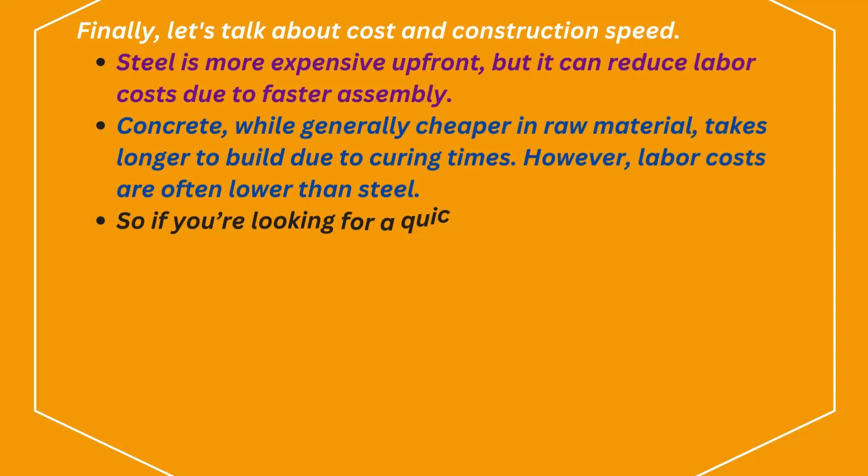Finally, let's talk about cost and construction speed. Steel is more expensive up front, but it can reduce labor costs due to faster assembly. Concrete, while generally cheaper in raw material, takes longer to build due to curing times. However, labor costs are often lower than steel. So if you're looking for a quick build, steel is often the better choice. But if you're focusing on long-term durability and fire resistance, concrete might be your go-to. So, which is better? It depends on your project's needs. Steel offers speed and flexibility, while concrete gives you durability and fire safety.

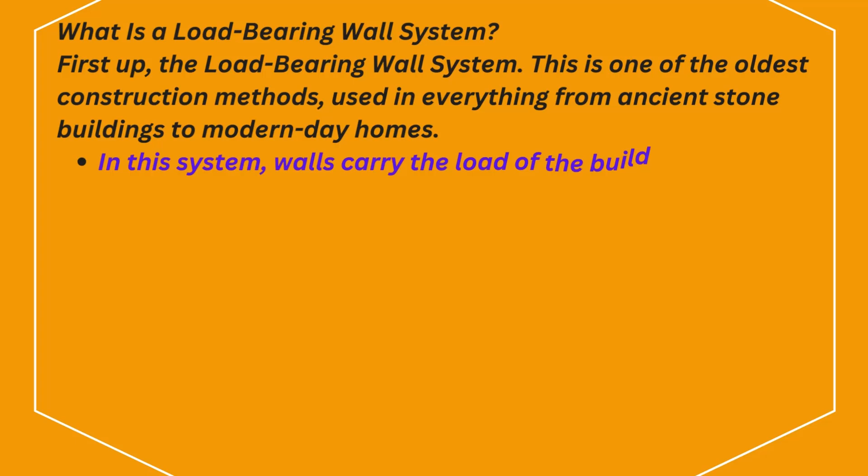What is a load-bearing wall system? First up, the load-bearing wall system. This is one of the oldest construction methods, used in everything from ancient stone buildings to modern-day homes. In this system, walls carry the load of the building, both vertical loads, like the roof, and lateral forces, like wind or earthquakes. These walls act as the primary support, and as a result, they can't be easily modified without affecting the building's stability. One important thing to remember: load-bearing walls usually limit the size of windows and openings because the walls need to remain strong to support the structure.

What is a frame structure? Next, let's talk about frame structures. Unlike load-bearing walls, frame structures use a skeleton made from either steel, reinforced concrete, or wood to support the building.

In this system, the frame, columns, and beams bear the load, while the walls are mostly non-structural, serving as partitions or for insulation. This allows for much larger windows, open spaces, and flexibility in design because the walls aren't carrying any weight. Frame structures are commonly used in high-rise buildings and modern constructions where open floor plans are important.

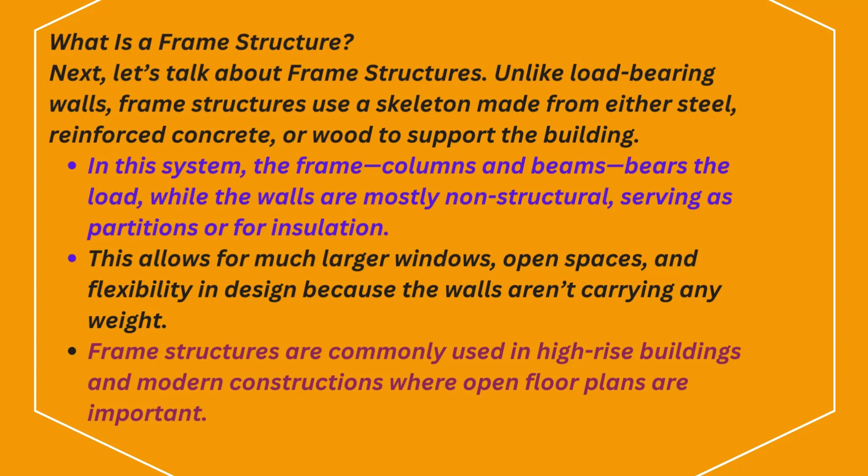Let's go deeper into the load-bearing wall system. What are its strengths and weaknesses? On the plus side, load-bearing walls are often cost-effective for smaller buildings, especially homes, because they don't require as much steel or concrete. They also provide excellent thermal insulation, which can make a building more energy efficient.

However, the downside is limited flexibility. Once the walls are in place, it's difficult to modify the layout without compromising the structure. And if you're looking to build taller than a few stories, this system becomes less practical due to the need for thicker, stronger walls. Now for the frame structure system.

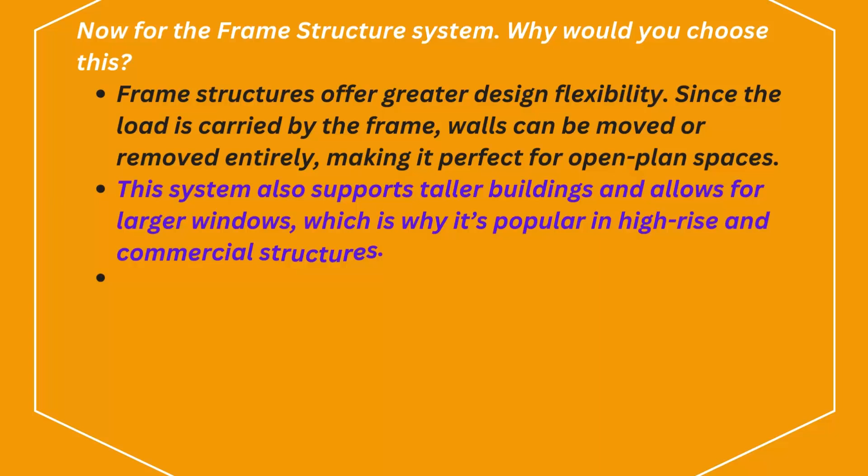Why would you choose this? Frame structures offer greater design flexibility. Since the load is carried by the frame, walls can be moved or removed entirely, making it perfect for open-plan spaces. This system also supports taller buildings and allows for larger windows, which is why it's popular in high-rise and commercial structures. But there are downsides too.

Frame structures can be more expensive to build due to the materials required, like steel or reinforced concrete. They can also require more specialized labor and take longer to construct.

Load-bearing versus frame structures: when to choose? If you're building a low-rise structure, like a residential house or a small commercial building, the load-bearing wall system could be a cost-effective and energy-efficient option. However, if you need design flexibility, large open spaces, or if you're going for a tall building, then frame structures are the way to go.

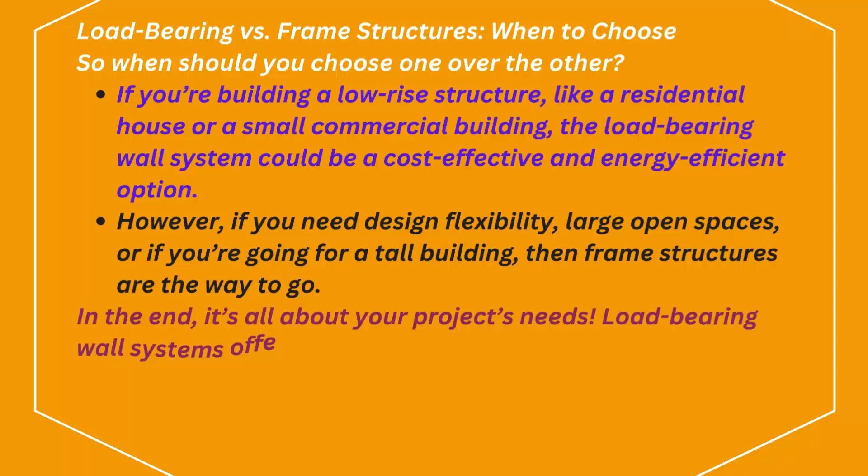In the end, it's all about your project's needs. Load-bearing wall systems offer simplicity and cost savings, while frame structures provide flexibility and support for larger, more complex designs.

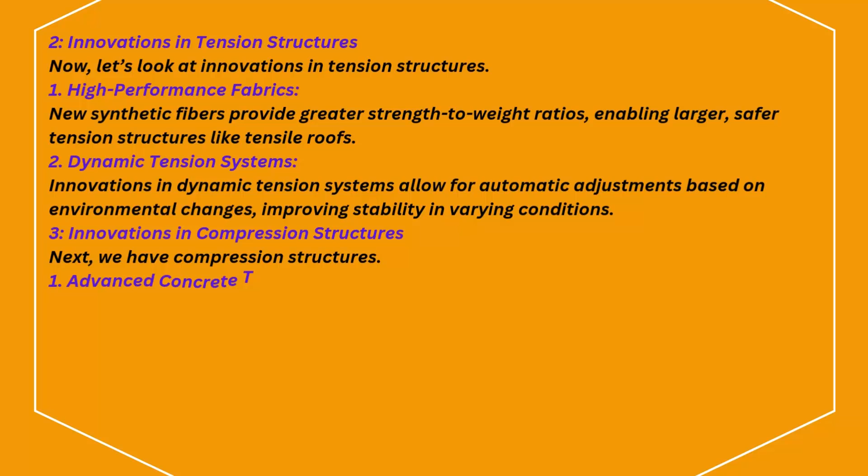Innovations in compression structures. First, advanced concrete technologies: ultra-high-performance concrete, UHPC, offers exceptional compressive strength, allowing for slimmer, more ambitious designs. Second, 3D printing: 3D printing technology enables the creation of complex compression structures that optimize material use and allow for rapid on-site construction.

Integrating tension and compression: combining these elements is leading to innovative hybrid designs. Cable-stayed bridges use tension cables to support the bridge deck, while compression towers provide stability, resulting in lightweight, aesthetically pleasing designs.

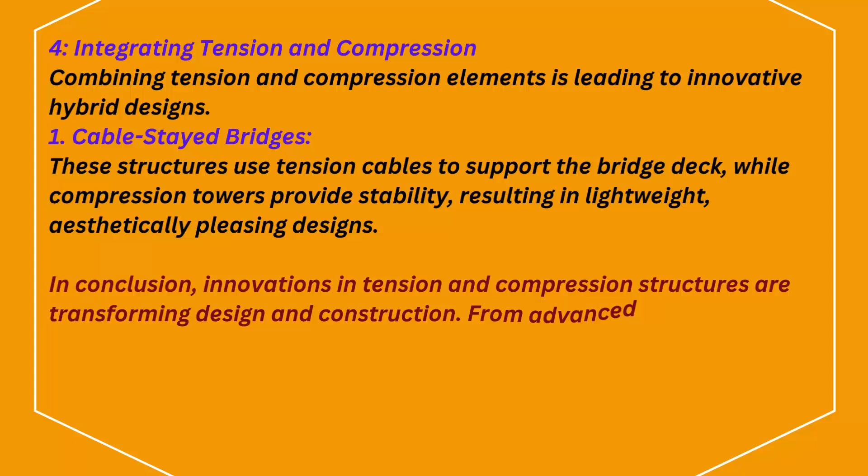In conclusion, innovations in tension and compression structures are transforming design and construction. From advanced materials to 3D printing, these advancements enhance the efficiency and safety of our built environment.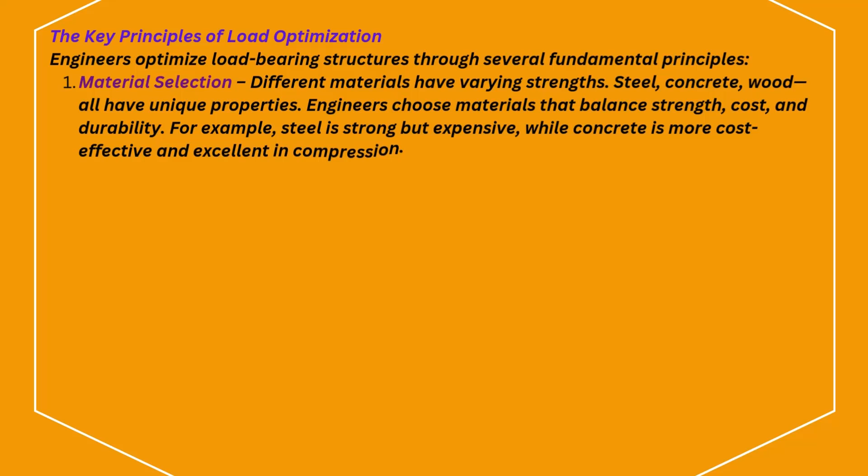Second, efficient shapes. Geometry plays a key role. Triangles and arches are often used because they distribute loads more efficiently than squares or rectangles. That's why you see triangular trusses in roofs and arched bridges. They're strong and require fewer materials.

Third, load distribution. Engineers design structures so that loads are evenly spread across multiple components. Instead of a single beam bearing all the weight, that load is shared across several beams or columns. Think of it as teamwork for materials. No single part bears the entire burden.

Fourth, redundancy. This means creating alternate load paths. If one part fails, another part can still handle the load. This prevents catastrophic collapses, making structures more resilient in emergencies.

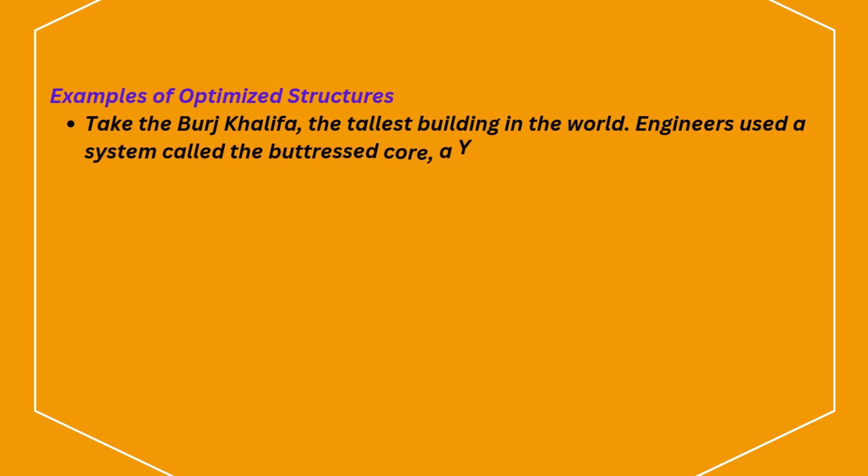Examples of optimized structures. Take the Burj Khalifa, the tallest building in the world. Engineers used a system called the buttressed core, a Y-shaped design that evenly distributes the weight of the tower, reducing the load on any one point. This allows it to soar to 828 meters while still being stable.

Or consider suspension bridges like the Golden Gate Bridge. The cables distribute the bridge's load, allowing it to span incredible distances while staying light and flexible. These examples show that optimization isn't just about using strong materials, it's about using them intelligently.

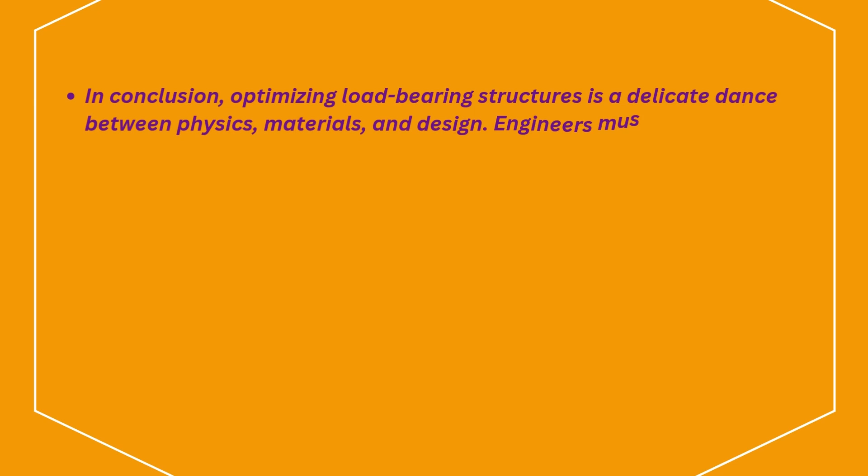In conclusion, optimizing load-bearing structures is a delicate dance between physics, materials, and design. Engineers must balance all these factors to ensure that buildings are both strong and cost-effective. The next time you walk into a skyscraper or drive over a bridge, remember, it's not just a structure, it's a carefully crafted solution designed to bear the loads of our world.

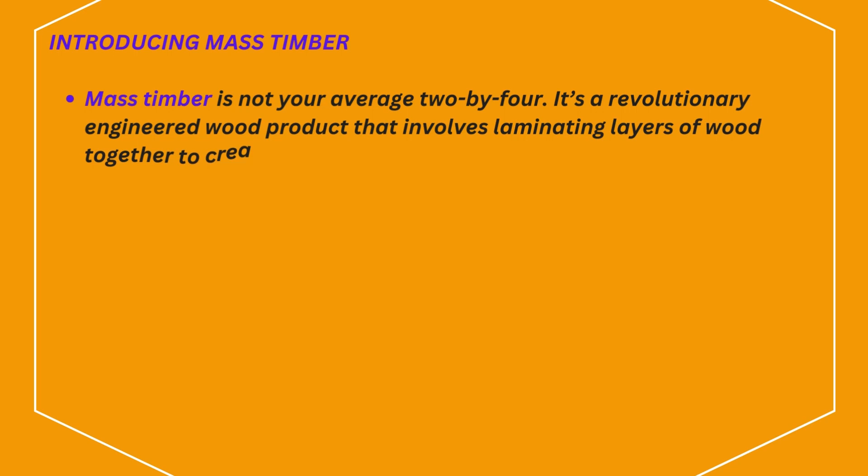The answer lies in a new type of wood material known as mass timber. Mass timber is not your average 2x4. It's a revolutionary engineered wood product that involves laminating layers of wood together to create a material that's incredibly strong, durable, and surprisingly fire-resistant. One of the most popular types is cross-laminated timber, or CLT for short. Think of it as wood on steroids. What makes mass timber special is its ability to match, and sometimes even exceed, the strength of concrete and steel. Because of its strength-to-weight ratio, it can support massive loads without crumbling under pressure.

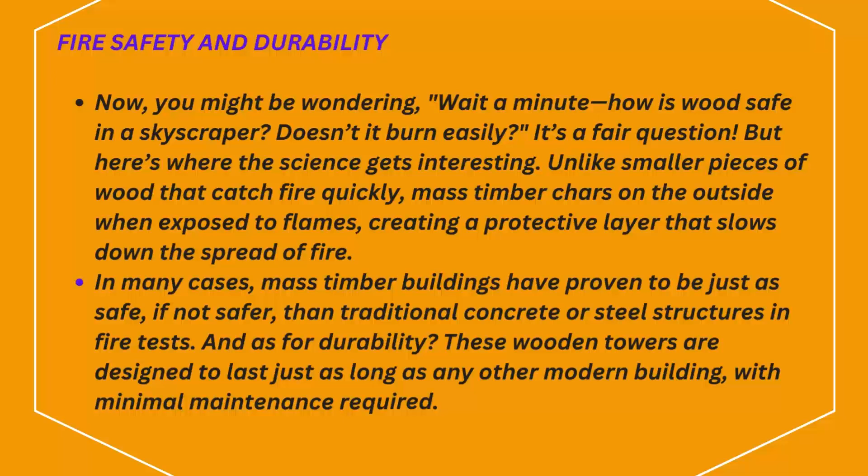Fire safety and durability. Now, you might be wondering, wait a minute, how is wood safe in a skyscraper? Doesn't it burn easily? It's a fair question, but here's where the science gets interesting. Unlike smaller pieces of wood that catch fire quickly, mass timber chars on the outside when exposed to flames, creating a protective layer that slows down the spread of fire. In many cases, mass timber buildings have proven to be just as safe, if not safer, than traditional concrete or steel structures in fire tests. And as for durability, these wooden towers are designed to last just as long as any other modern building, with minimal maintenance required.

Environmental impact. One of the biggest benefits of building skyscrapers with wood is the environmental impact. Concrete and steel require a lot of energy to produce, and they release tons of carbon dioxide into the atmosphere. Wood, on the other hand, is a renewable resource that stores carbon throughout its life, making it an eco-friendly option. In fact, if we start using mass timber on a larger scale, it could drastically reduce the carbon footprint of the construction industry.

We're talking about a greener future, where towering cities are built from sustainable materials. Examples of timber towers. Still skeptical? Well, let's look at some real-life examples.

In Norway, there's the Mjøstårnet, the world's tallest timber building standing at 18 stories. And it's not alone. Projects like the HoHo Tower in Vienna and Brock Commons in Vancouver are proving that wooden skyscrapers are not only possible, but are already reshaping city skylines around the world.

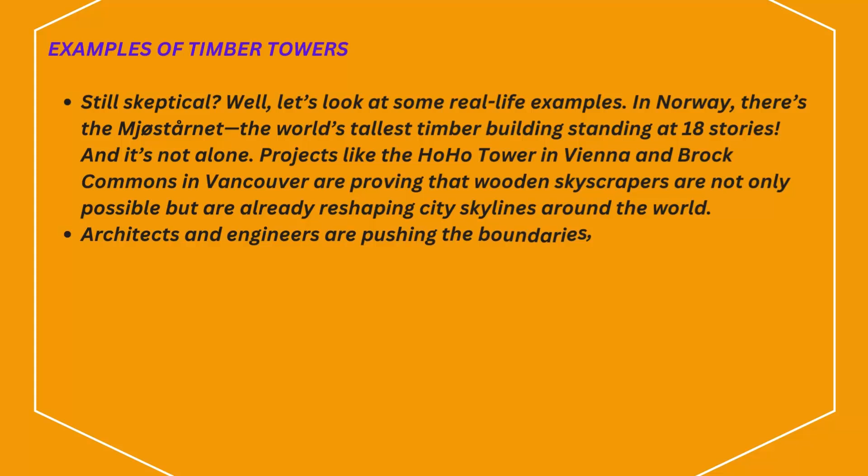Architects and engineers are pushing the boundaries, and some are even designing timber buildings that could reach 30 stories or higher. The potential for wooden skyscrapers is only just beginning. So, can you build a skyscraper out of wood? The answer is a resounding yes. With mass timber, we've unlocked a new frontier in construction that's not only strong and safe, but also sustainable. As urban populations grow and environmental concerns rise, timber towers could be a key part of the future.

These towering structures seem to defy gravity, effortlessly hanging between two points. But what's the secret behind their strength? The basics of suspension bridges. At first glance, suspension bridges are marvels of simplicity, but don't be fooled. The science keeping them standing is anything but basic.

A suspension bridge consists of three key parts: the deck, cables, and towers. The deck is the part of the bridge you drive or walk on, but it's not just resting on solid ground. Instead, it's suspended by cables, massive steel ropes that connect the deck to the towering vertical structures on either end, called the towers. These towers hold most of the weight.

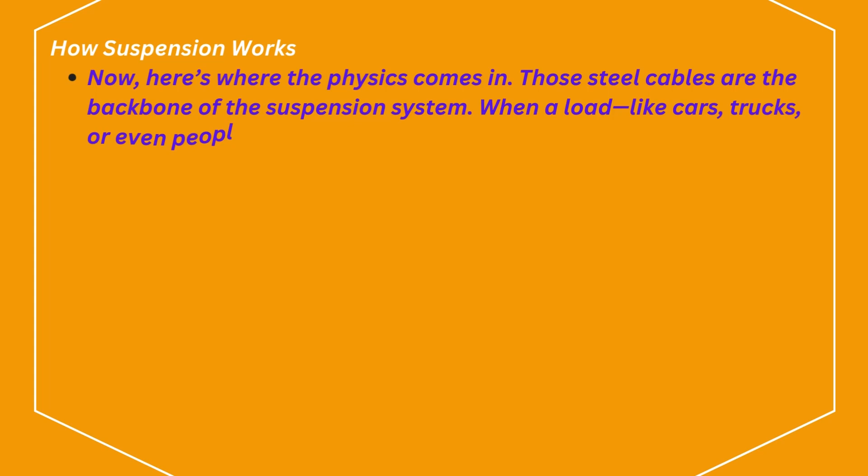How suspension works. Now, here's where the physics comes in. Those steel cables are the backbone of the suspension system. When a load like cars, trucks, or even people moves across the bridge, it creates downward force on the deck. The cables take that force and spread it across the entire span of the bridge. They transfer the load to the towers, which then transfer it down into the ground, or foundations, deep beneath the surface.

Think of the bridge as a giant hammock. The cables are like the ropes of the hammock, and the deck is like the fabric. The weight on the bridge causes tension in the cables, but the towers act as anchors, keeping everything in balance.

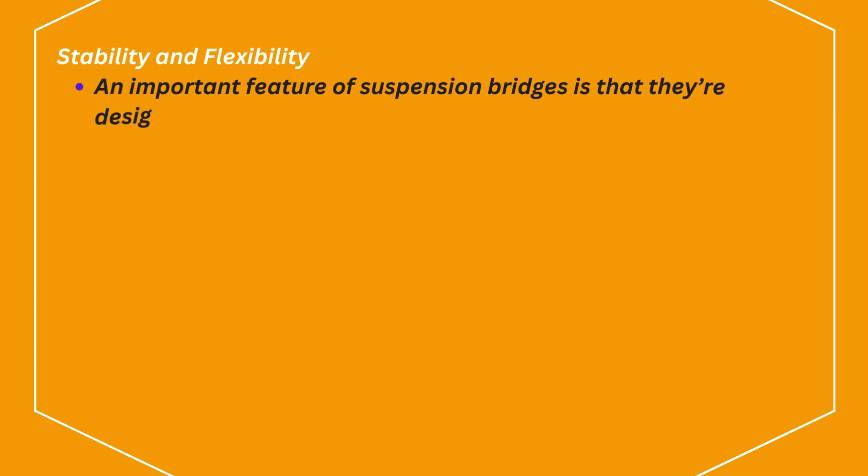Stability and flexibility. An important feature of suspension bridges is that they're designed to be both strong and flexible. In fact, flexibility is crucial. Winds, temperature changes, and even earthquakes can cause the bridge to move slightly. That movement helps it absorb stress instead of breaking. Engineers calculate how much sway a bridge can handle to ensure it stays standing, even in harsh conditions.

The cables are made from thousands of smaller steel wires twisted together, allowing them to carry incredible weight and remain flexible enough to handle shifting forces. So the next time you drive over a suspension bridge, take a moment to appreciate the science at work. It's not just concrete and steel, it's an intricate dance of tension, weight distribution, and flexibility. That's the magic that keeps these bridges standing tall and strong.

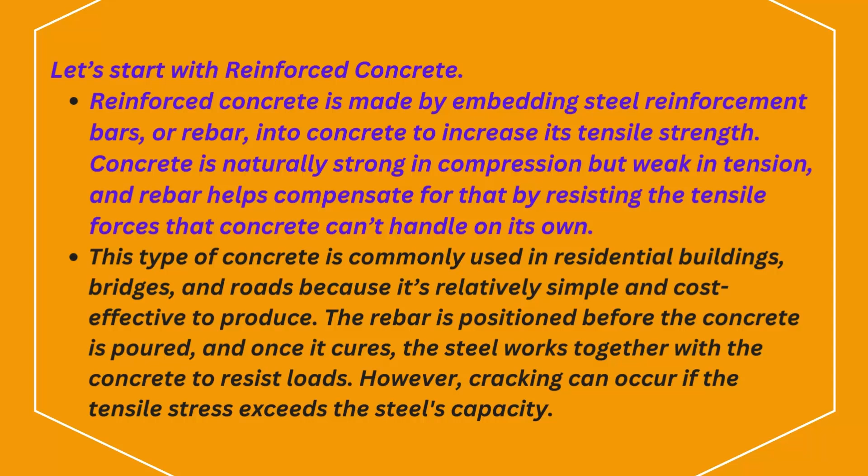Now, let's move on to pre-stressed concrete. Pre-stressed concrete takes the concept of reinforcement a step further. Before or during construction, steel tendons or cables are pre-tensioned or post-tensioned to put the concrete under compression. Since concrete performs best under compression, this process allows pre-stressed concrete to resist both compression and tension much more effectively than reinforced concrete.

Pre-stressed concrete is often used in larger structures, like bridges, parking garages, and high-rise buildings, where minimizing cracks and deflections is crucial. By applying tension to the steel cables, the concrete remains in compression even under heavy loads, reducing the risk of cracking and allowing for longer spans and thinner slabs.

So, what are the key performance differences between the two? First, crack resistance. Reinforced concrete can develop cracks under tensile loads, which can lead to structural issues over time if not properly maintained. Pre-stressed concrete, on the other hand, is designed to minimize or even eliminate cracks because of the pre-applied compression forces.

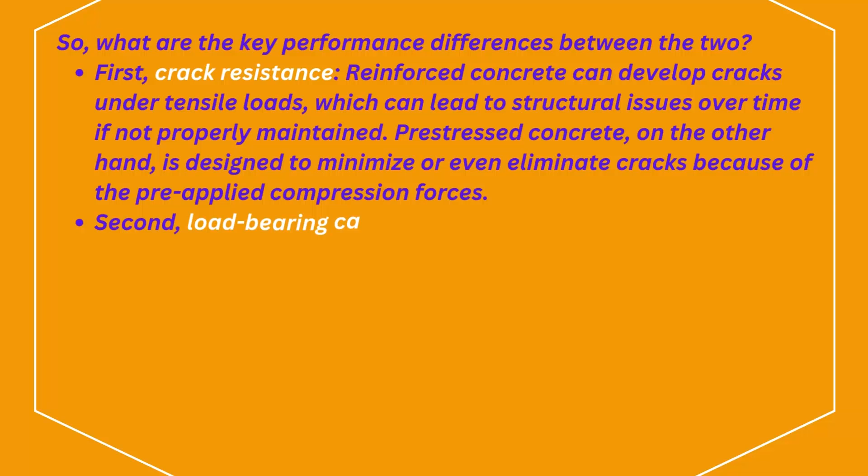Second, load-bearing capacity. Pre-stressed concrete is much stronger and can handle heavier loads and longer spans without sagging or cracking, whereas reinforced concrete is better suited for shorter spans and moderate loads.

Finally, deflection. Pre-stressed concrete deflects less under load due to the tension steel, making it ideal for projects where minimizing deflection is critical. Now, let's talk about cost and complexity. Reinforced concrete is simpler and cheaper to produce, making it a go-to option for smaller projects or structures where high loads and long spans aren't as important.

It's easy to work with, and the construction process is straightforward. Pre-stressed concrete, on the other hand, is more complex and requires specialized equipment and labor for tensioning the steel cables. This increases both the cost and construction time.

However, the benefits of increased strength and reduced cracking make pre-stressed concrete worth the investment for larger, more demanding projects. So, there you have it. Reinforced concrete is great for simpler, smaller structures, while pre-stressed concrete excels in high-load, long-span, and crack-sensitive projects.

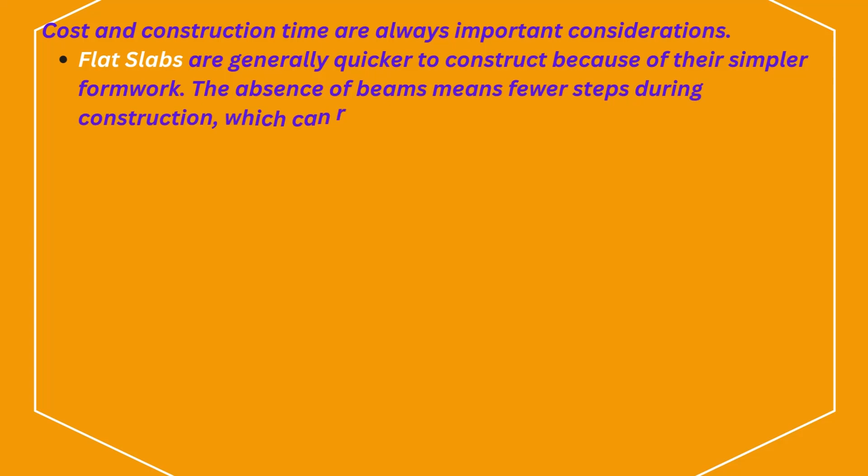The cost and construction time are always important considerations. Flat slabs are generally quicker to construct because of their simpler formwork. The absence of beams means fewer steps during construction, which can reduce labor costs and save time. But remember, the thicker slabs and additional reinforcement may increase the cost of materials.

Two-way slabs, on the other hand, involve more formwork and reinforcement due to the inclusion of beams, which can slow down construction and increase labor costs. However, the overall material cost may be lower, especially if the beams allow for thinner slabs.

So, when deciding between flat slab and two-way slab systems, it comes down to your project's needs. Flat slabs offer more open space and speed, while two-way slabs give you more strength and cost efficiency in certain designs.